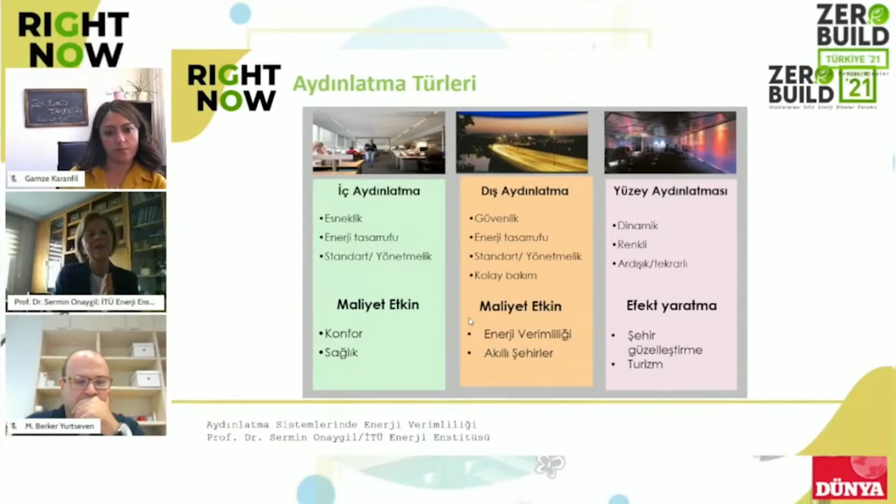I work on roads and tunnels, and I continue to work there and like it very well. They are more challenging lighting forms, as you need to calculate much detail. However, here we see internal lighting, external lighting, and surface or superficial lighting. If you categorize them, we can better understand each other and appreciate the differences.

Let's look at internal lighting. Here we should have flexibility, because I make use of this room one way today - I might change it tomorrow. I'm using this place as an office; I might use it like a bank tomorrow. So you might need flexible solutions, and energy savings matter - we discuss it a lot.

Here we need to look at the standards and regulations and deliver what is required. Everyone is talking about lighting, but the number of people assessing whether the requirements are met is really low. First, we should meet the requirements and then try to save on top of that. They say you should compare apples with apples, not pears. Also, they should be cost efficient with comfort and health aspects.

Now I move on to external lighting - security and criminal crimes are part of it. Energy saving is the second item. Standards and regulations also apply there. So, because we're talking about external solutions, easy maintenance is the fourth item.

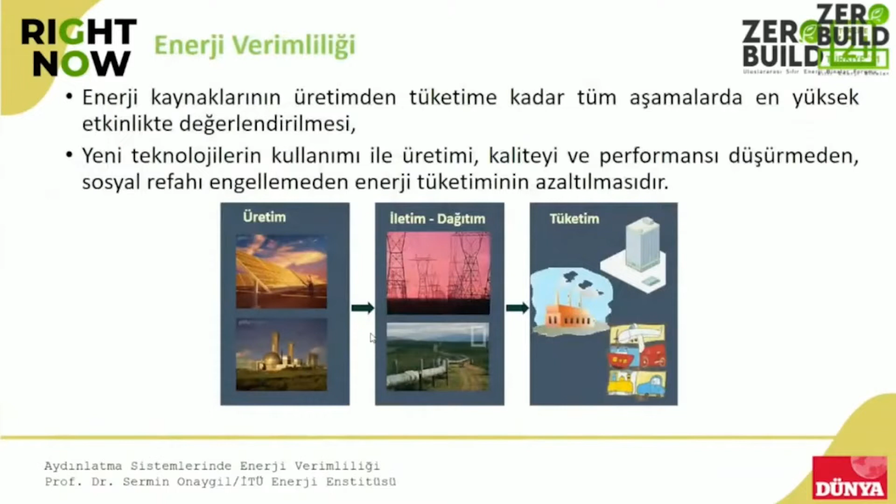Now we're talking about energy efficiency. Generally, that's where we focus. You take one source of energy and make it go through different stages. In these stages, you need to think about an illumination-based approach. You may turn off the light and have savings, but that's not what we mean. We mean we will use new technologies and ensure that we actually focus on social welfare. If tourism is important, then you need to illuminate. If security is important, you have to do it. So ensuring energy savings without minimizing those costs is important.

Energy savings should be separate from energy efficiency. Energy savings can be deliberate or indeliberate. Here, users decrease the amount of energy they use or minimize it by themselves. But in energy efficiency, you need new technological means. You should have an awareness, and you should also serve a certain goal. There are multiple parameters here. Everyone is talking about energy efficiency as a buzzword, but how is the main question. Different experts should work together as capable individuals about technology, but also multiple parameters like the economic and social dimensions should be considered.

If you have two lights, two bulbs, you can turn off one of them and have savings. But as you see, the bulbs will be switched to LED bulbs. When you use this unit with less consumption, technologically speaking, you ensure energy efficiency.

Lighting consumes electricity energy, and here we can say that it is an important parameter in terms of energy efficiency. Generally speaking, in industrial facilities, in commercial buildings like shopping centers, hospitals, offices, and even residential buildings, when you make an overall evaluation, you can say that 19 to 20% of the electricity energy is used for lighting purposes. But these ratios change depending on the usage area. That's 30% for a shopping center, but it can go up to 60% in hotels or 40% in offices. In homes, it's 10 to 20%, as refrigerators are an important factor since they continuously work. In the textile industry, this number goes up to 30%, but in iron and steel industry, it's just 2-3%.

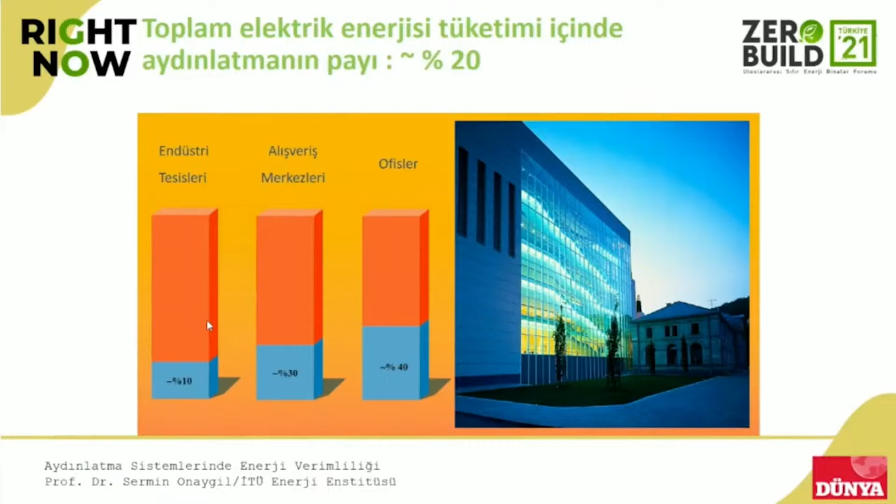And here we know that we have to continue our path by decreasing energy costs here in all the current buildings.

So we differentiate efficiency from savings. Efficiency isn't about turning off the lights. You're not actually compromising on your comfort. When you do these lights more than necessary, this may look great, very glaring, but that creates an adaptation problem for people, as other spaces without this many road lighting elements will seem dimly lit by comparison. That's why we should have a holistic approach.

And we have our national energy action plan. We have certain targets; we say we will have savings of 20% until 2023. We have strategies, etc. That's all great, but we should meet the necessary lighting criteria, and we should examine well so that we do not move to a dangerous area.

What should we do? First, we will use appropriate light sources. Everyone is on this line, they say we must deal with it. Let's say we change the chargeable lamp unit. You remove that, you replace that, but you need to conduct calculations before doing that. You will not send light up in the air; you need to emit the light to the road surface if you do that. So actually, you need to work with armatures whose values are known.

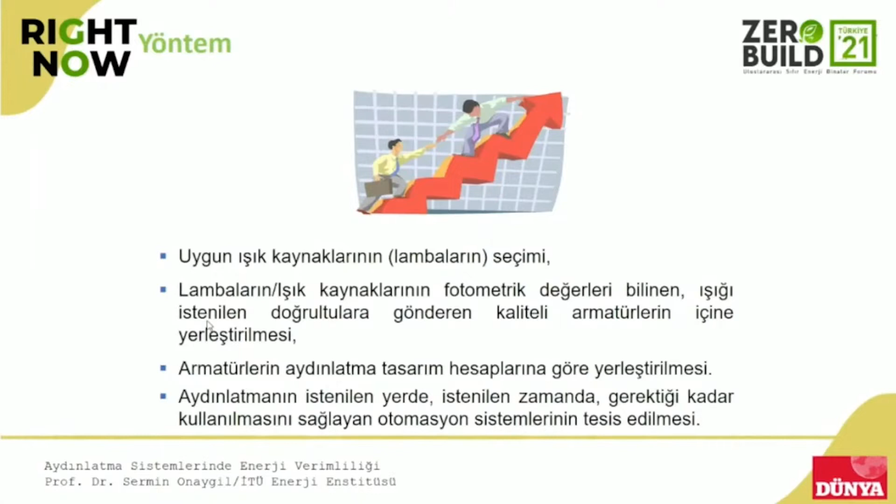These devices and armatures need to be calculated in terms of savings. We must know the types and varieties. Now we move to savings calculations for armatures and fixtures, and limiting their use to the necessary requirements. In offices, we can do certain activities within certain hours, so we need to test the automation systems as we calculate that.

If you want to decrease your energy consumption, I didn't want to elaborate on formulas much, but let's elaborate. This is the watt-hour energy, electricity energy consumption - it's joule divided by second, or watt. And here, when you enter a building, you can also check your home or school.

You see different armatures in classrooms, different armatures in corridors, teachers in the teachers' room, in canteens. So every installation needs to be assessed separately, and that's how we make this calculation.

We need to look at the number of armatures in every installation, the amount of power drawn, and the duration of usage and dimming for these armatures. If you pay attention to all of this, then you're going to reach the overall amount.

Here I would like to point to this area, which is about power. Actually, our light sources do not work by themselves. They have transformers, drivers, ballasts, and other elements that work with them. So power should be considered as the total energy taken from the grid.

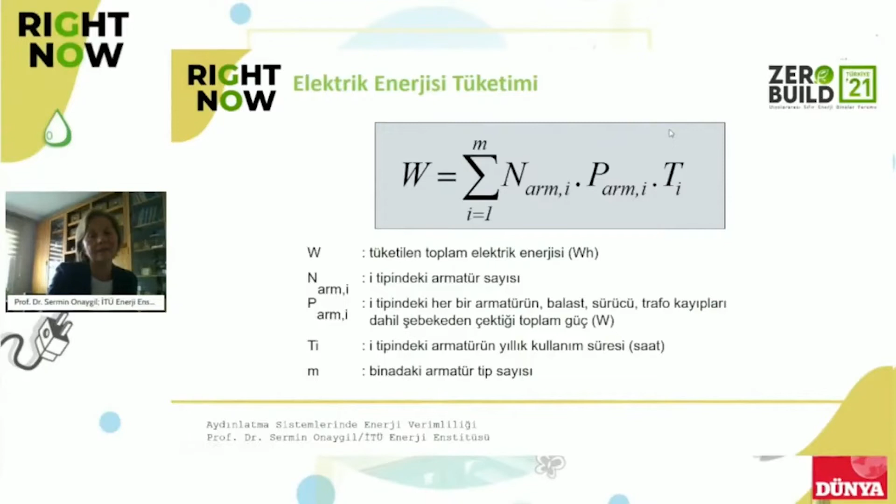You need to look at where you need the lighting - on top of the table, in the house, on the road - and here you arrange the timing with automation systems, and you need the appropriate strategy and systems.

And here you can see a summary of it. You should follow up on the newest technologies and choose the most efficient light sources and other elements - ballasts, transformers - and here LED is included. Also, we should ensure that we place the light in high efficiency armatures, and control systems and lighting systems should be working wherever necessary.

By the way, Professor Gamze, if you have any questions, please do interrupt me. Sure, Professor, I'm following. I am going at full speed, so please - no, it's going very well.

Well, we have to make efficient use of all these sources. Everyone is talking on this layer. Unfortunately, we have to go deeper together with the architecture discipline.

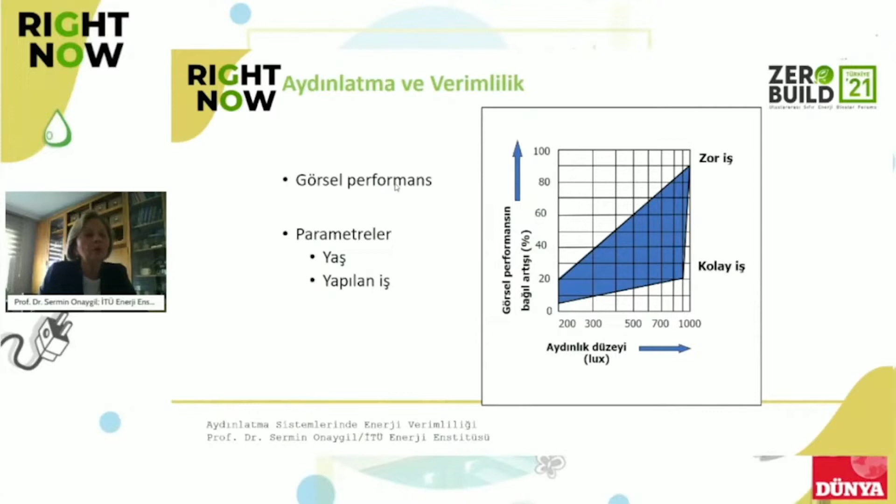Also, I have to refer to efficiency not just in terms of the decreases in energy bills. You are having a conference with many agenda items, and here they're talking about zero buildings, net zero energy.

Here, actually, the user is the most important element. When you ensure comfort, actually you see an increase in efficiency. And that's a huge argument for us in lighting, for inside and outside the buildings.

By improving lighting, we see many activities inside the buildings - qualified staff works there with well-paid jobs, but the number of sick days or performance evaluation days, and safety issues, if you consider all of them - for example, in night shifts, a person might get their hands squeezed in a machine.

So all these security issues are strong arguments. You need to look at the parameters also outside the invoice. It is something very difficult, but we need to have such research activities. We can do this by checking something before and after, and also you need to have observations and check the performance of a person.

So here we use lux as a lighting level. When you increase this, actually the visual performance is enhanced accordingly.

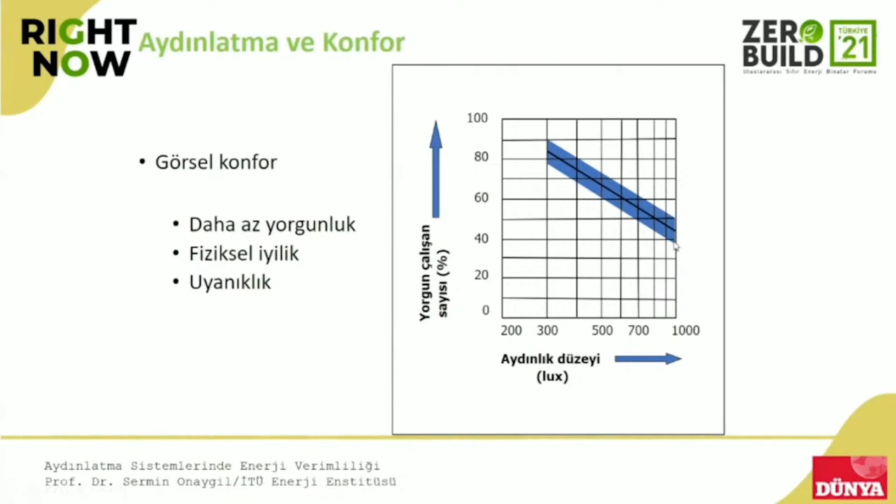Exhaustion - for example, night shifts. They conduct tests to understand exam performance under a particular type of lighting versus another. So visual performance is related to lighting level. If it increases, the number of employees with fatigue actually decreases. That's why lighting is an important parameter.

Also errors - in the automotive industry, where you have manufacturing of quality products, mistakes matter crucially. Customer satisfaction, quality product, the number of products with a defect - all are actually taken into consideration as lighting parameters.

Accidents - you can talk about traffic accidents or occupational accidents. For example, someone due to stroboscopic impact may see something turning as static due to lighting issues, or a pedestrian might actually appear suddenly before a vehicle. If you do not have good illumination there, you may cause accidents.

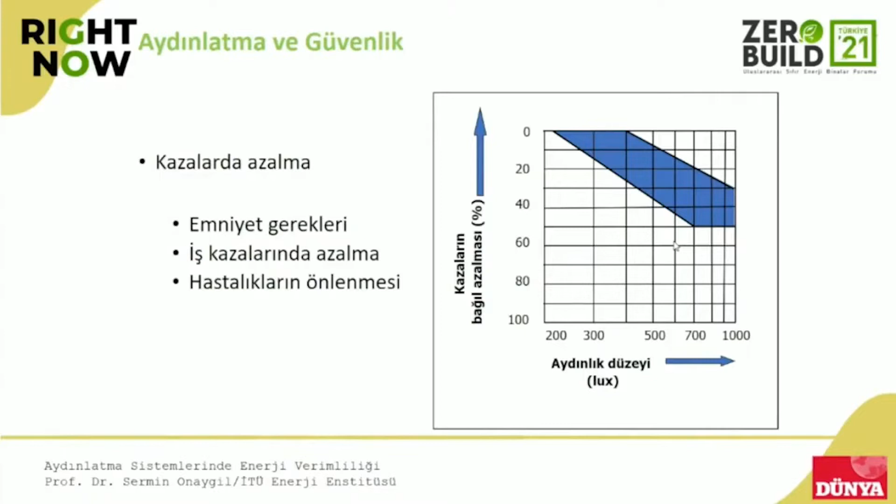Also diseases are addressed, and COVID-19 is a daily topic. When we looked at lighting, we used to think of visual impairments in the past. However, with UVC bulbs, we know that microbes or other germs can be killed. So there are different sets of research concerning that, and it's difficult to sum up everything in a short period of time.

Electric vehicles, stairs, elevators are all part of it. But illumination or lighting systems are included in our system together with architectural project design, building and facility installation, heating, cooling, lighting, and renewable energy cogeneration, creating a cycle.

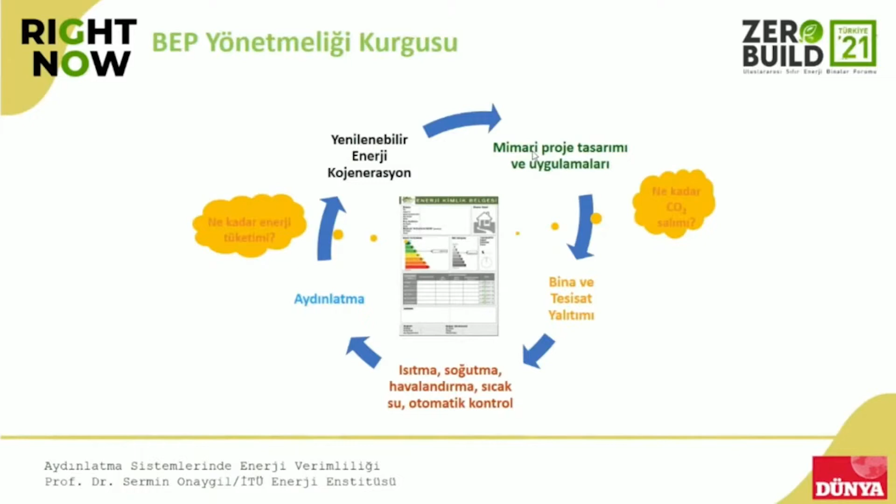And here we have a certificate which provides this information: the amount of energy consumed and its equivalent as CO2 emission. They say you can turn off the light and save energy, but should that be the real mindset? It shouldn't, because in illumination and other areas there are standards and regulations. The values should be the main priority - ensuring that we meet these regulations.

We can look at new buildings and current buildings. In new buildings, we have those at the project stage, and here we have computer support. Since 2011 they are evaluated as part of the lighting systems with certain okay and missing points. But in current buildings, we need to look at certain aspects, including projects, and sometimes they are missing.

An office building might be utilized differently - on one floor there might be an insurance company, on another floor there might be a bank. So it's difficult to just look at the projects; we need to have on-site technical evaluations.

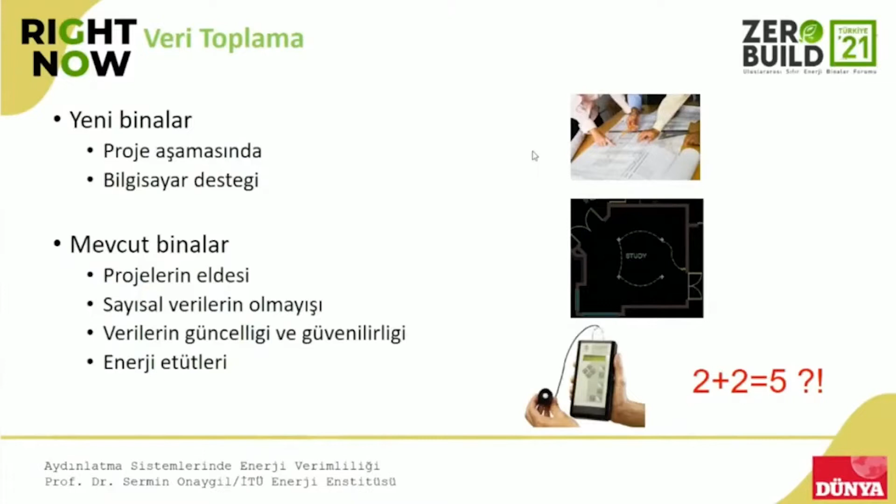You see the lack of figures, and you have issues regarding the updates, so we have to look at data. This is all related to the current system which is present, and then of course based on the climate and other things that should be taken into account. So when we say installed power, we have to look at the luminaire numbers, also the number of light bulbs, etc. The photographing and other things have to be done in this regard.

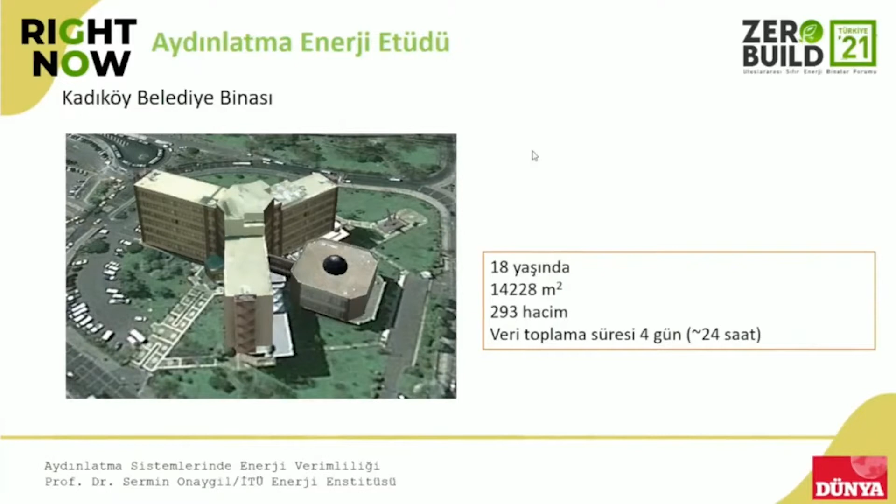For example, in the Kadıköy municipality building, it was done in 4 days and 24 hours of work. It is an 18 year old building, 14,228 square meters, with 293 volumes. They were put into Excel files, and it looked at what the current situation is and what suggestions are recommended, trying to have it within proper system harmony.

Of course there is the lighting energy numeric indicator, which is called LENI in English. So we can say that AESG in Turkey is about the installed power, the energy amount in kilowatt hours, divided by square meter and year.

Let's say you have 1,000 square meters, how many kilowatt hours of energy you use, and somebody else did the same with a similar square meter, but the conditions of use can be different. Or there could be two classrooms, for example, one has 500 lux and the other has 300 lux. So the 300 lux one is spending less energy. Can we say that this is better performance?

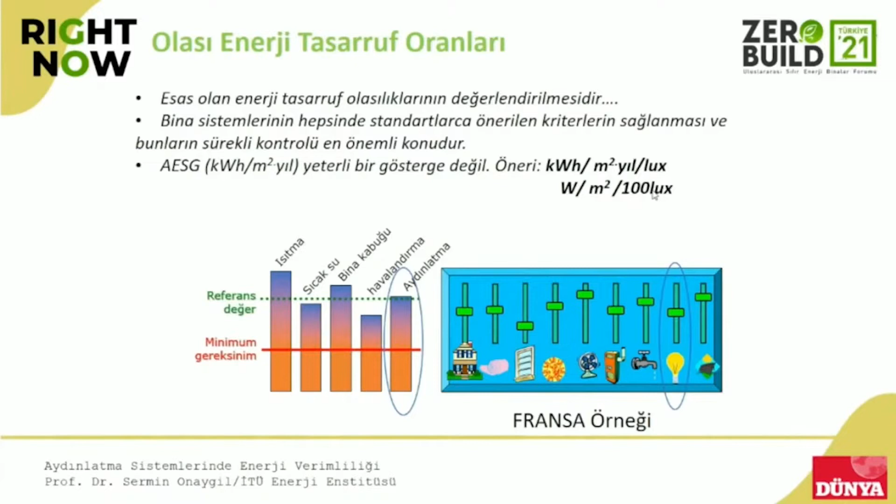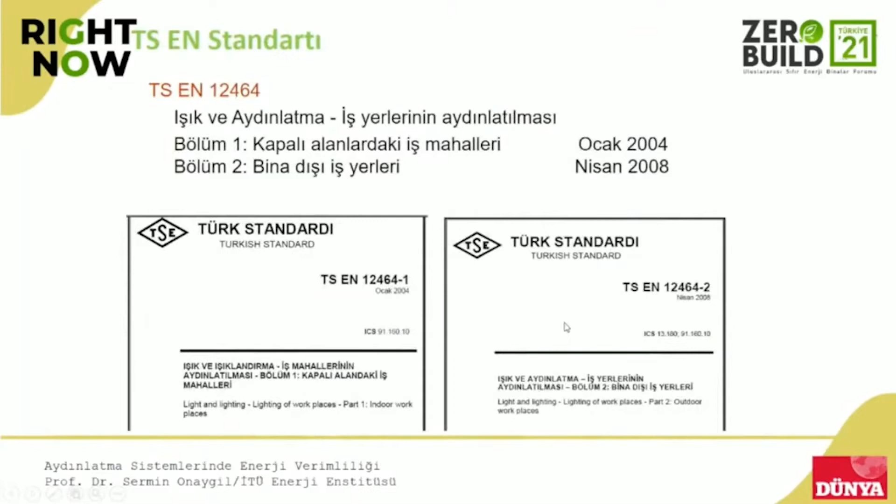We're trying to evaluate this, and of course we look at whether these conditions are there. There are many things like occupational safety, etc. There is a general 15193 energy directive as a reference, and there is a lighting systems standard, 12464, which is a Turkish standard. The first one was for internal, and the second one is for external lighting.

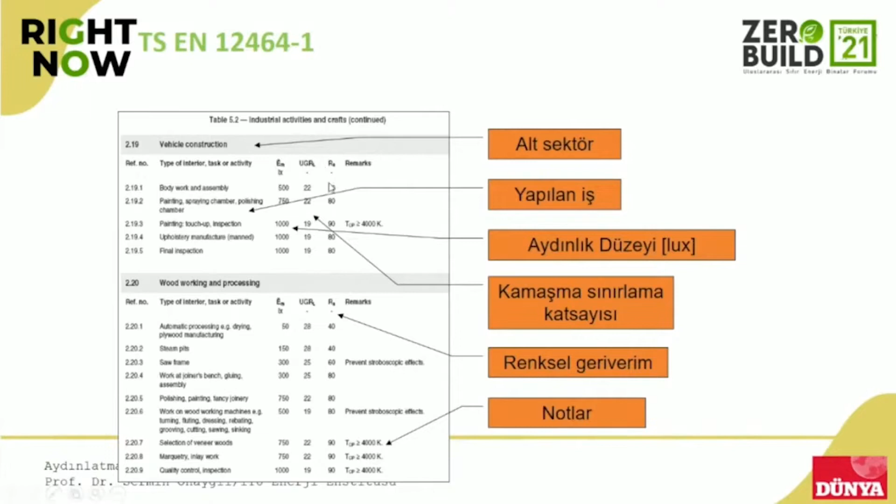When you look at this, for example, there is the automotive sector. It shows whether there's assembly or painting, what is the absolute manufacturing, and it's based on this, and also the color for this, and there are certain remarks.

So when we look at this, when you put a large light source there, there is the lighting power magnitude, and this is the level of lighting. It is measured with lux, and you can get a photo cell and measure this. But if you look at it from one angle or another, it is different. If it's frictional or a flat surface, that is different. So when you ask what you see and look at this, there is also the brightness.

For example, the critical lightings. Of course, we look at this and we make a calculation about what we see. But in the building, flux is generally enough. We can say that the lighting divided by lumen can be found.

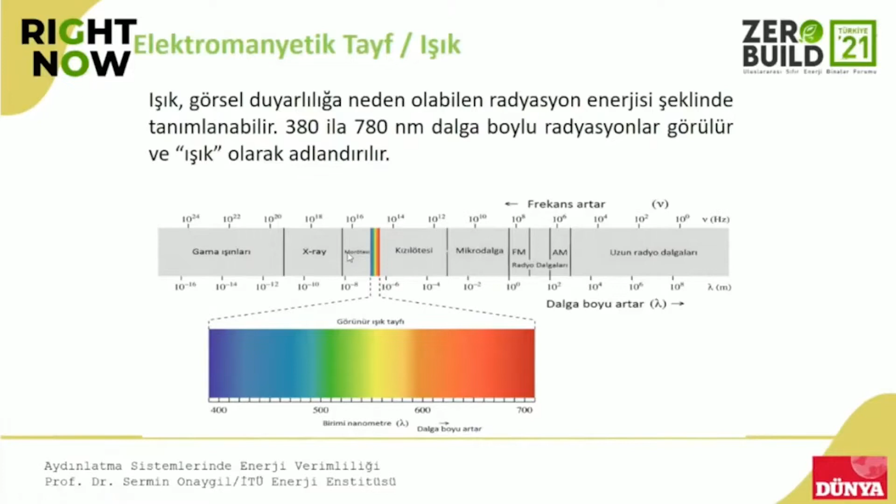And also, when we look at this, we can say 360 nanometers and more. We can see the right hand side is infrared, and the other one is X-ray. As you see, when we say lighting, it's between 380 nanometers and 780 nanometers, but there are different wavelengths. For example, there is 555, that is the highest one. This is for daylight, and also there is for buildings. This is only available, of course, like a curve there.

You see the blue ones and the red ones, and if I am the producer of an energy efficient light bulb, if this is so, we can say I need to give a light resource with yellow and green. This would be an efficient resource, but for other countries, it's a different part of this spectrum.

So when you say blue and red, you see it under sunlight, daylight. So there are different types, and if they are lacking, you don't see it as red, you will see it as brown actually. So the efficiency and also the perception of color is different.

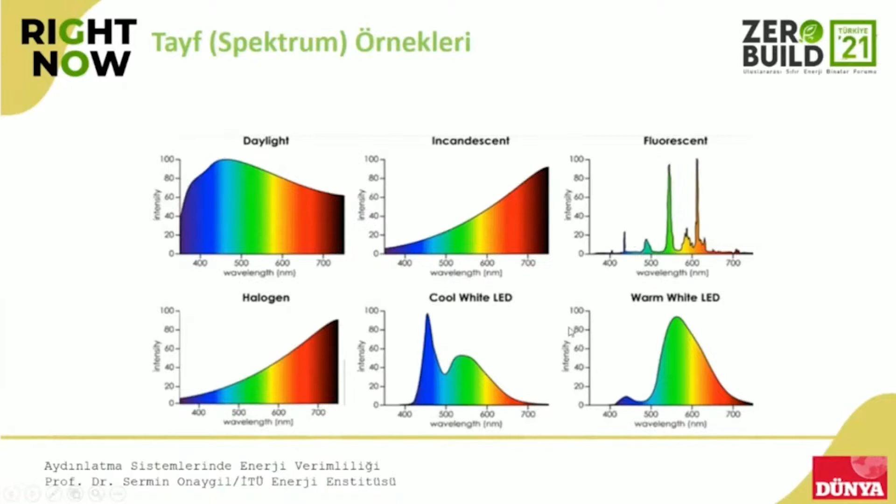For example, in daylight all of them are there, and in an incandescent light bulb, everything is there too, good but not efficient, or fluorescent. And when we look at LEDs, for example, it's a blue one. These are the polar colors, cold colors. When you go to red and yellow, those are the hot colors. So it's about having this - it affects the color, whether it is red or yellow, hot or cold. So when you go away from Edison's light bulb, you have to look at this very carefully.

When we say lighting production, there are two systems. For example, in a fireplace, timber or wood is burned, and here with different sectors, for example discharge lamps. From one to the other, there are new technologies, the LED blue ones, and now we have LED power and LED resources. We do not use this in incandescent, and so there are sodium lamps as we can use.

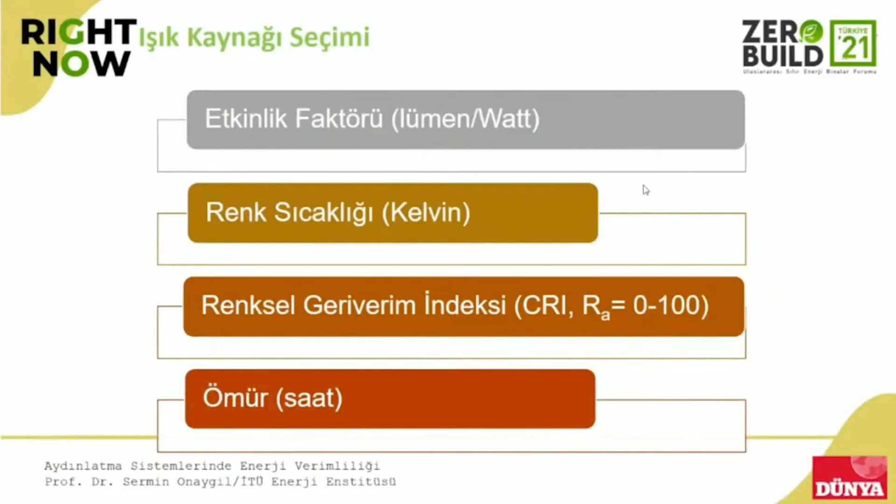You pull some power from the network, but there is the light. You can see it as a watt, and there's an efficacy factor with lumen. You should notice when we say lumen, this is about the radiation, the value of radiation that you can see. So we can say beneficial radiation for beneficial lighting. When lumen divided by watt, it gives you the light.

For example, Edison's number is 12 lumen per watt. For example, for LED, it is 150 lumen per watt.

So there are many different light bulbs, and in 2019 and 2020, there are eco design requirements for the classification of the lighting resources, classification of the users, and there are self-limiting studies like refrigerators, like the buildings. The lighting goes from A to G, but for A, it has to be more than 210 lumens per watt. So there are other things. This is very difficult to achieve.

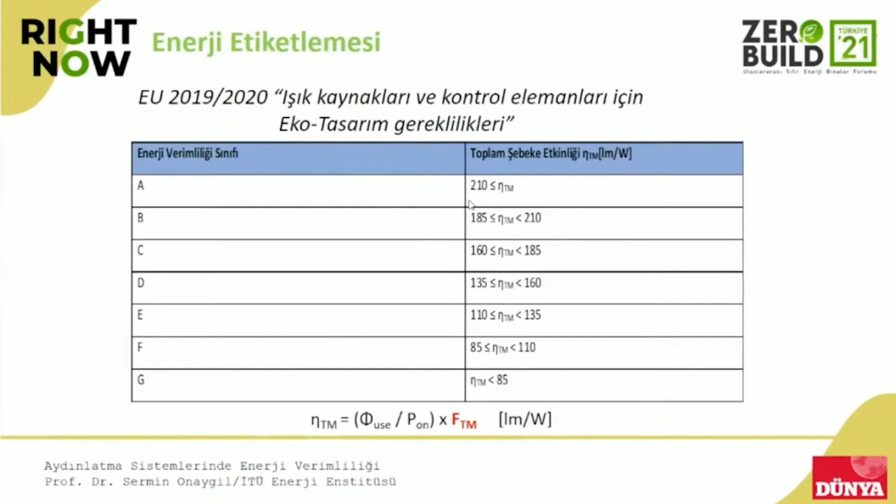So in energy efficiency, new technologies are challenged. When new technologies are used and when the project is done, it's not saying that I will use a fluorescent only. You have to look at the lumen per watt, and this is how the energy classification should be there. So we look at the lumen per watt.

There is a reverse correlation. I select the highest efficiency one. For example, I'm doing something with a textile industrial shopping mall. For example, a person takes a coat as green, but it is actually confused as brown.

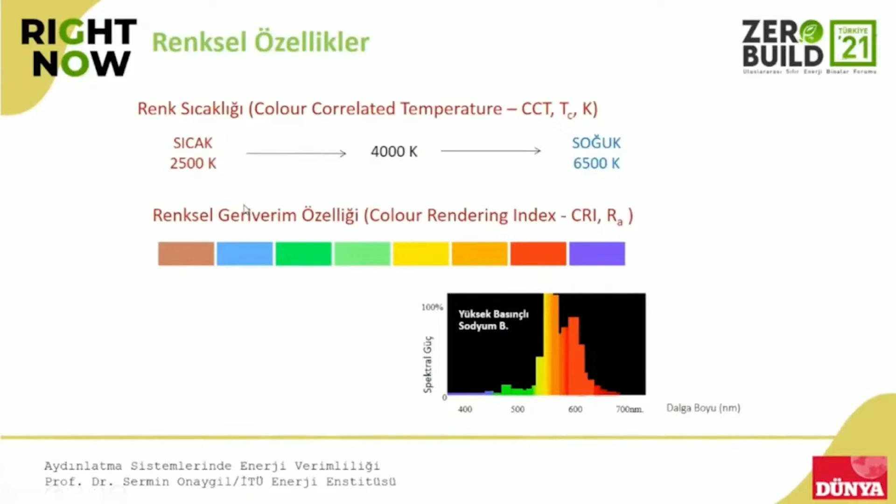So when there is the color, of course, Kelvin - the correlated color temperature system. So if there is the color rendering index for optimum, you have to compensate or compromise the watt, and we have to look at the correlation.

The color resources should be there. When you say I'm putting this for that, you have to look at all the things, and some people like the ones called, for example, the LEDs, no matter what, they are cold colors. So this is about the structure, and when you look at the LED, there is the hot and cold. As with Edison's light bulb, we see that there is much good progress in this regard.

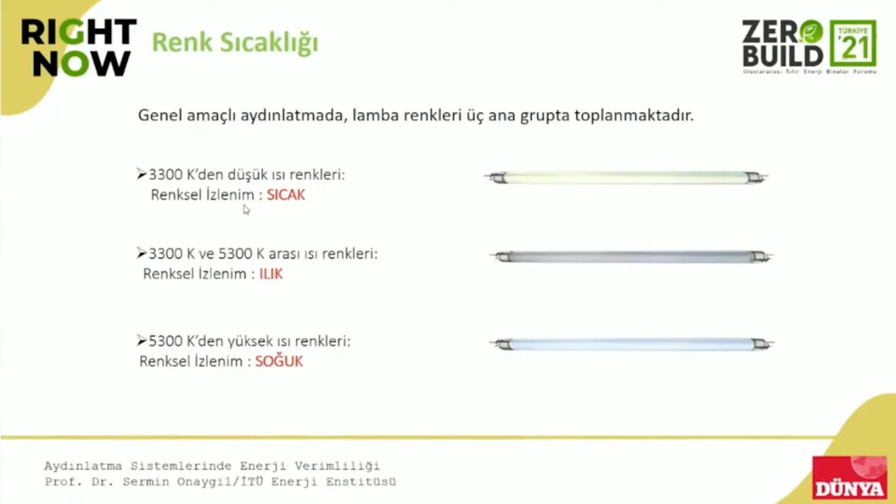The Kelvin, there is this like a reverse correlation. It means that the hotter it is, the bluer it is actually. But it's about the value you use.

So you can use hot colors for low ones, and if there's timber and wooden materials, hot colors are taken, and for teachers, if they are making some activities, we can say that it's more than 4,000 Kelvin, and also there is human centric lighting.

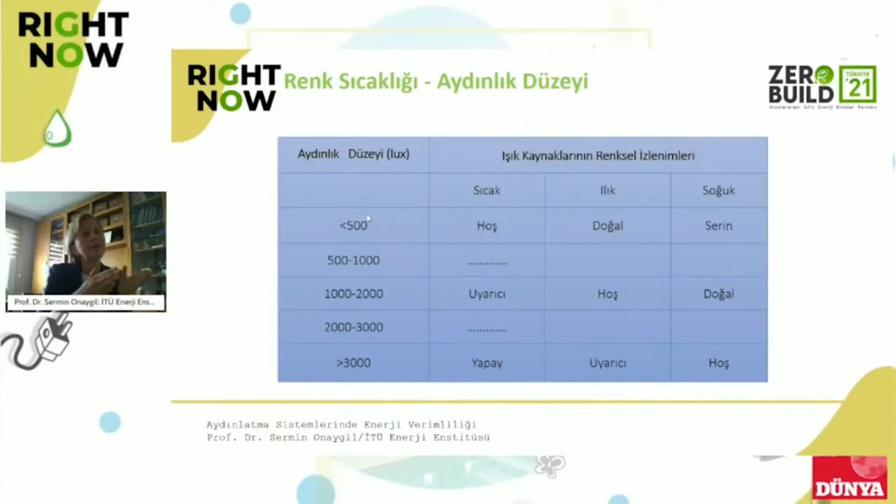There are automation systems which regulate the color. The child wakes up and comes, and this is hot colors. And when they go back, there are hotter colors. So we can say that the colors in terms of productivity increase, and in terms of the acceptance of what you do, are very important. These are all important arguments.

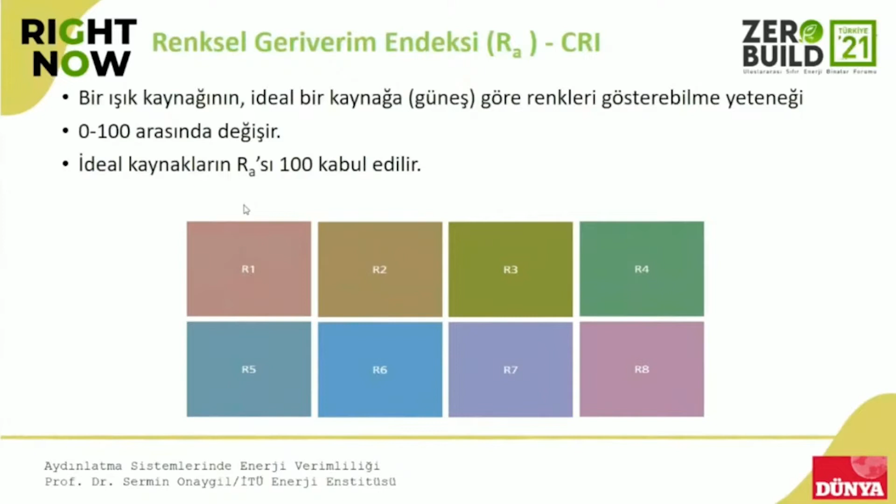And of course, there is hot and cold colors, and also it's about making the perception of the red, green, and blue colors. So indoor lighting, this value changes from 0 to 100, and it is not possible to use below 80 - it is forbidden. However, in an art workshop, even where sketches are made, you have to put it at like 95.

So the life cycle is important, and of course, as I pointed out, Berker gave me a bit of time, like 10, 15 minutes, for the systems. Should I continue, right?

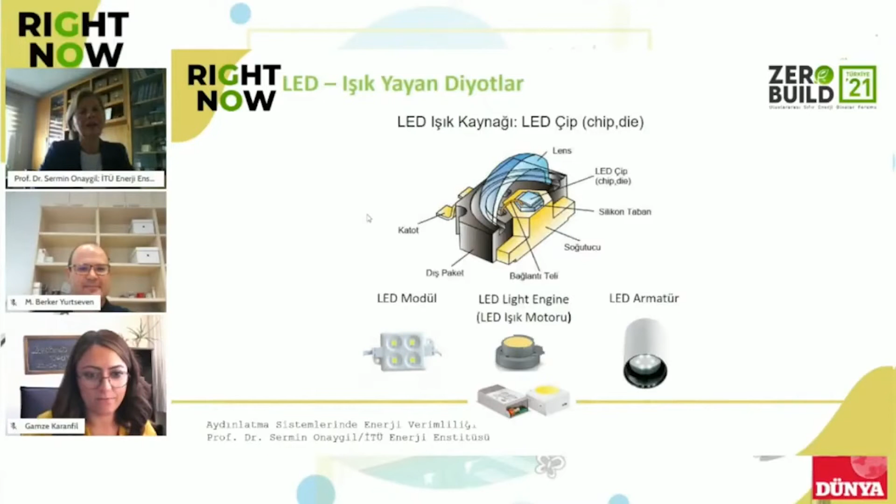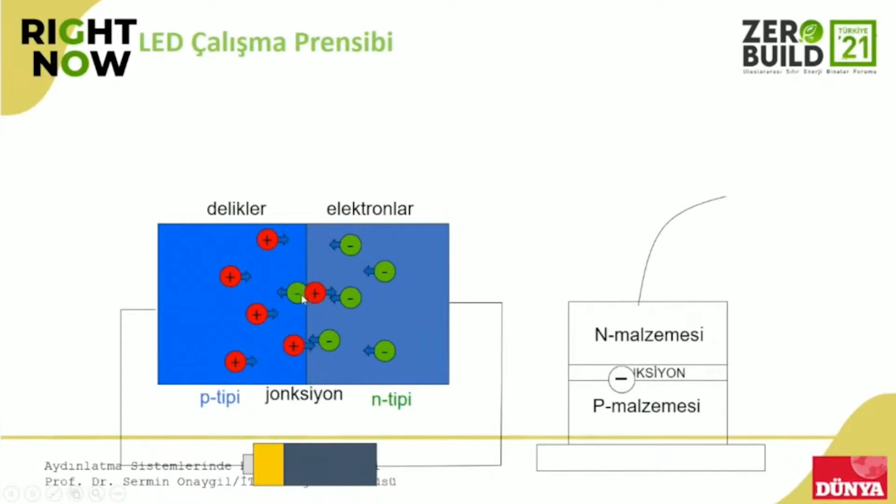It says conductive there, and there are two systems, in positive and negative, we see two powers, and also there's electrical current that is given there, and also we see at the junction there are some holes here, and when you have this, you see that it produces a light. It's actually creating radiation, and it could be photons, and we could see that effect.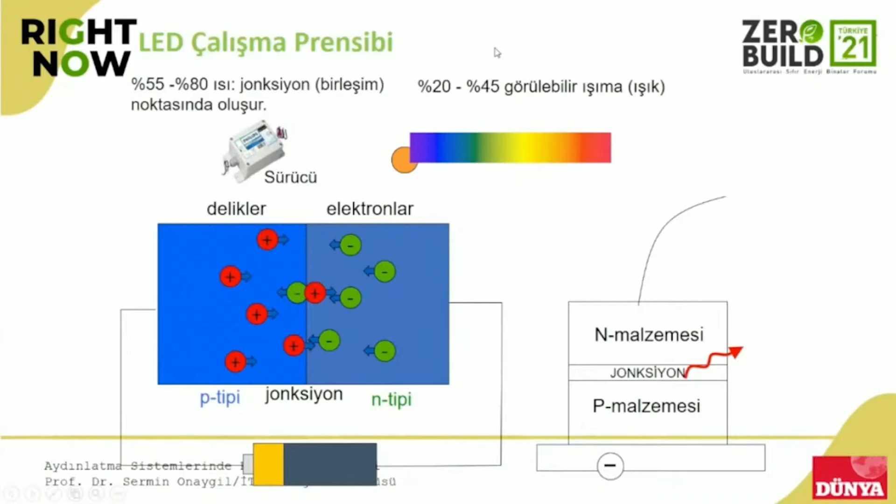So it should be looked at, and also we see the heat, and it is a loss, decreasing that increases efficiency. It is used with the driver as there is a right current, there is electrical efficiency, and there is thermal efficiency, and as far as we can see, it has to come up with the power.

When you see that there's a phosphoric layer, it shows the seeable area. In order to give you seeable light, there could be a short wave. There is phosphorus there, and the phosphorus is put in the ultraviolet area. So we see the white color lighting with this, where the red, blue and green are mixed, and you have the power, but you have to have lighting. Generally it is used in the short wavelength.

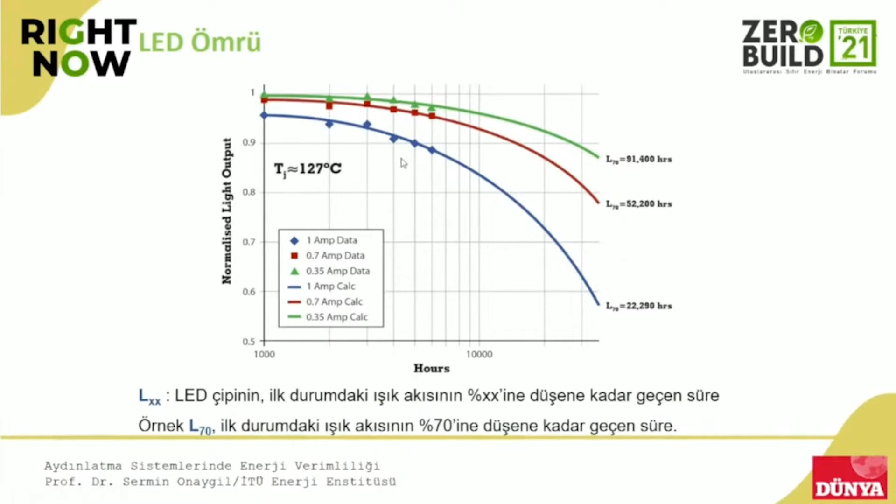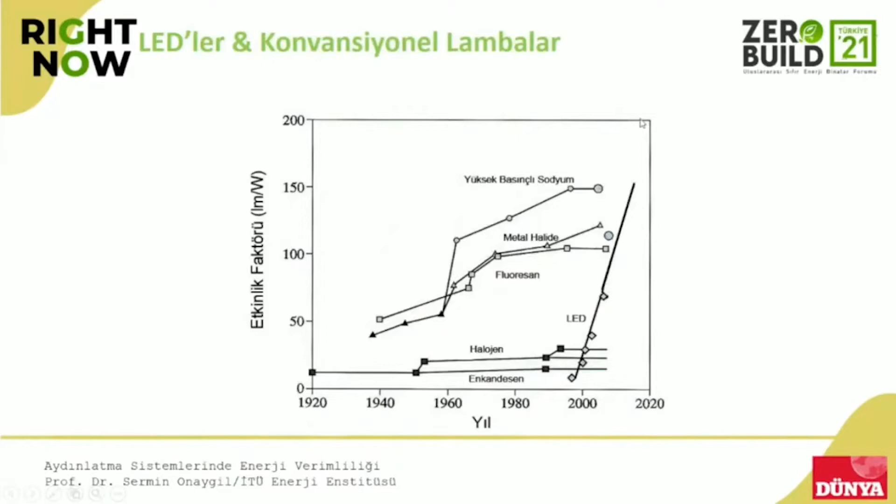There is a phosphor, the yellow phosphorus is coated, and when you look at LED, you see that actually in all of these, the use temperature is very important. Efficiency is very important. So when you say you switch to LED, you have to look at studies to evaluate all the factors. But since 2000, the others are there, but the LEDs are replacing the conventional light sources.

I have two slides here, about the lumen per watt. When you compare all of these, for example, in incandescent we see 8 to 22, and in LED 80 to 180.

But at the same time, under normal conditions, for example here, a fluorescent lamp has 110 lumen per watt. You have to be more careful while putting LED here. For example, the sodium, high pressure sodium, is 70 to 150.

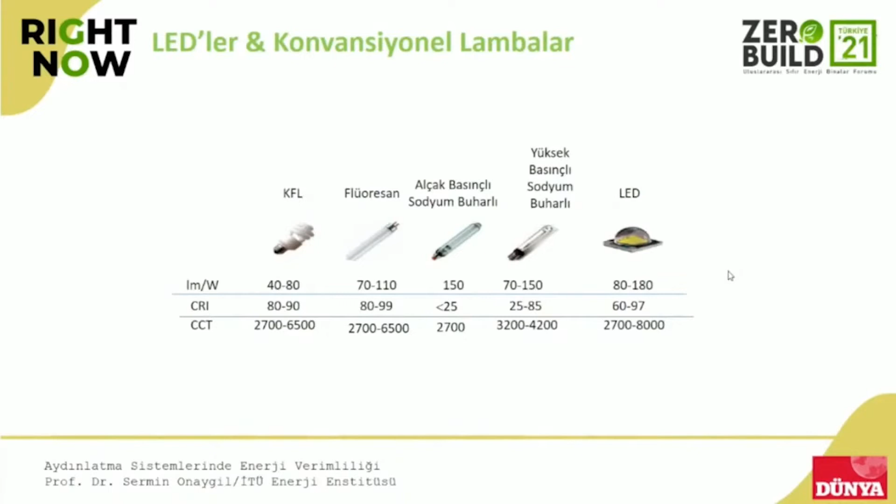So since 2000, the companies are working in this regard. There are the right specifications with the right implementations, practices and applications. We're trying to continue. There is the LED, the lens, the printed one, the cooler, the driver, the armature.

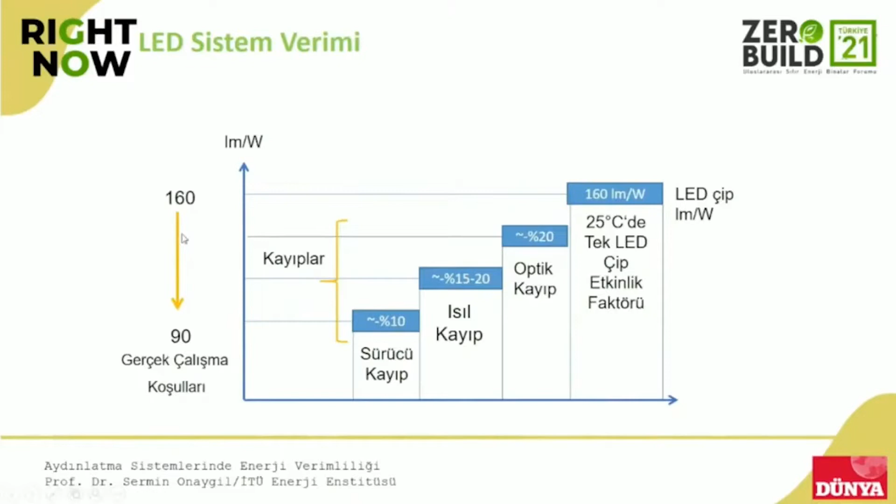So we can say that this is the armature, and we cannot now make a separation. It has to be evaluated together, as we cannot make a separation. A chip can have a part of 160 lumen per watt, but it can go down to 90 lumen per watt, and it should be 130. So you have to come up with the armature, and you have to use the design of 130. So the distribution is very important.

The photometry, it is called, and for example there is direct lighting, but in terms of comfort conditions, the indirect ones could be used, but the direct ones should be used.

Of course, control - opening, turning it on and turning it off - there are motion sensors and controls, and integrated systems are there, integrated with heating and cooling systems. So for example, the radiation actually increases or decreases your heating or cooling gains. And of course, within the building management systems, that has to be taken into account, and the lighting becomes a very important element.

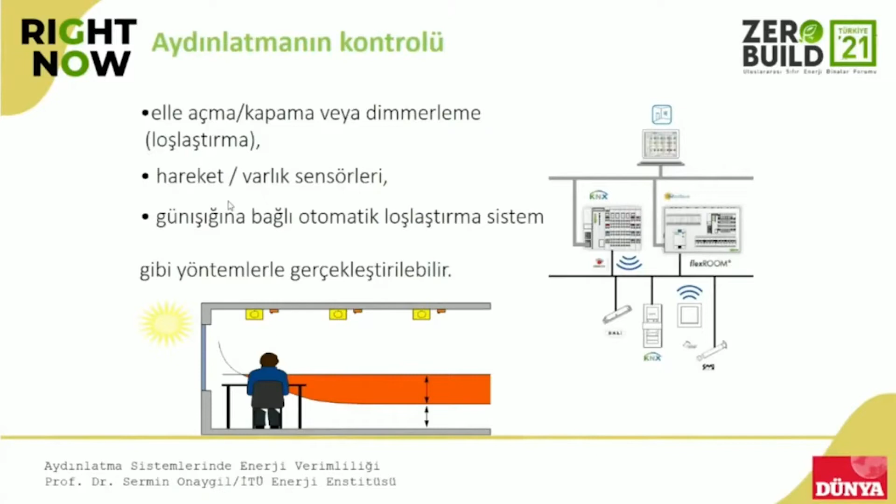So it is not easy to do that. That is what I'm trying to say. Sometimes the clear-cut approaches may not be the right approaches. You cannot say that I put the light bulb, and the ROI is 6 months. So when you have integrated activities, we are talking about the return of investment being like 3 or 4 years, and when you consider it from the performance, you have to have implementable projects.

I'm saying this because, for example, in zero build activities, we are using a technology, and when this technology is selected right in the beginning, of course there will be a cost. And of course, the return of investment should be taken into account with these parameters.

For example, this is an office building that you know very well in Istanbul. It's 18 stories, started with offices, then it turned into banks and insurance offices. So, for example, the armatures changed, so then there needs to be 500 lux, but when you just measure it, it is 200 lux. It is an 18-story building, with 12,000 square meters of land.

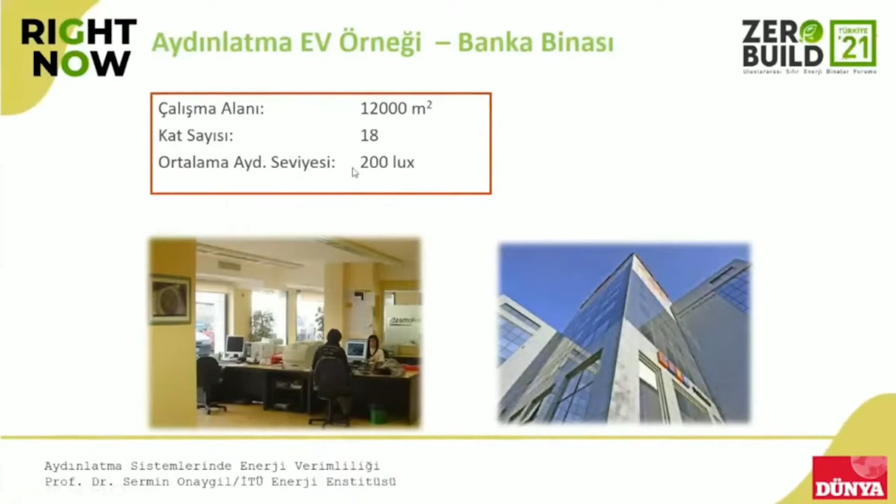For example, when you look at the system, there are fluorescent light bulbs, and you can go for LED or better lights. And after doing this, actually 200 lux is not enough. It has to be 500 to 550 lux.

This is what is offered by the standard. So we will increase it from 200 to 500, 550. This is how we make the savings. Of course, the armature number decreases when selecting the good armature. So when we look at electric energy, the saving is like 50%. And when you have the daylight control system, the saving is more than 60%. However, the return of investment is in 4 years.

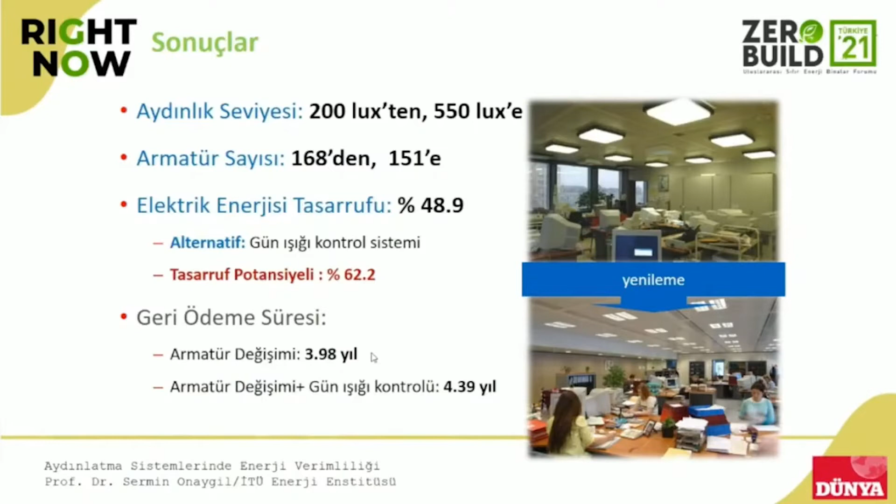However, I can tell you that with the lighting systems, you can install systems which have a return of investment of 3 years. So if it is 6 months, it means that it is not conducted very well. But so 1 to 3 years, there could be good solutions.

I'm going through the end of my presentation. Actually, we have some tolerance for questions and answers. The calculations are very important, the designs are very important. But at the same time, there should be data of the armatures that you're using. For example, there are sheets and calculation methods. It's like making a project. So it is not that I put it and take it out - it means that I calculate and then I put it there.

For example, when you look at this, there are four fluorescent lamps, tubular T6, used everywhere. There are 4 armatures also at 18 watts. However, here it's 33 lumen per watt. I make the calculation - although my objective is to achieve 500 lux actually.

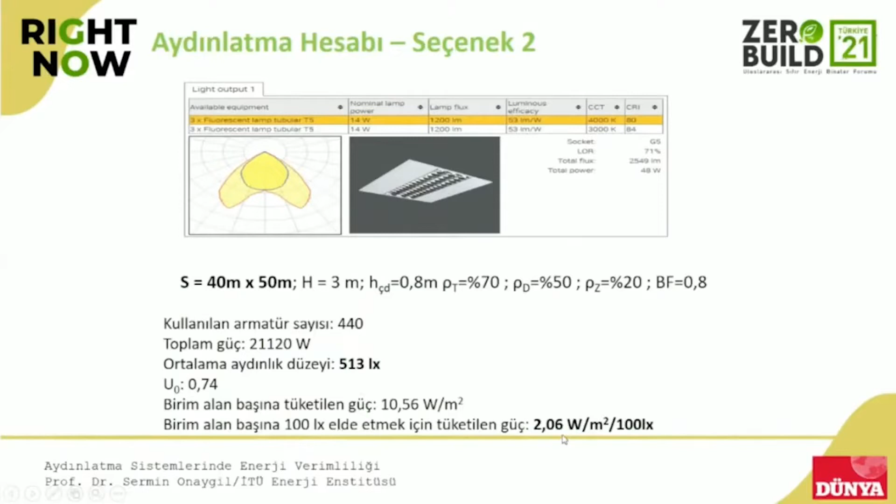As I told you, in order to have 500 lux, we need to look per square meter how many watts that I should spend. It is 2.2. We will look at this as a whole in a minute. And I bought a different armature, and there is a different structure there - this one is 53 lumen per watt. And the lux is 513, and now the indicator is 2.06.

We bought a different armature. We use this, and there are 2 lamps, but it is 120 centimeters. So now it is 73 lumen per watt. However, there is 516 lux, and when we look at the indicator, we decrease to 1.5.

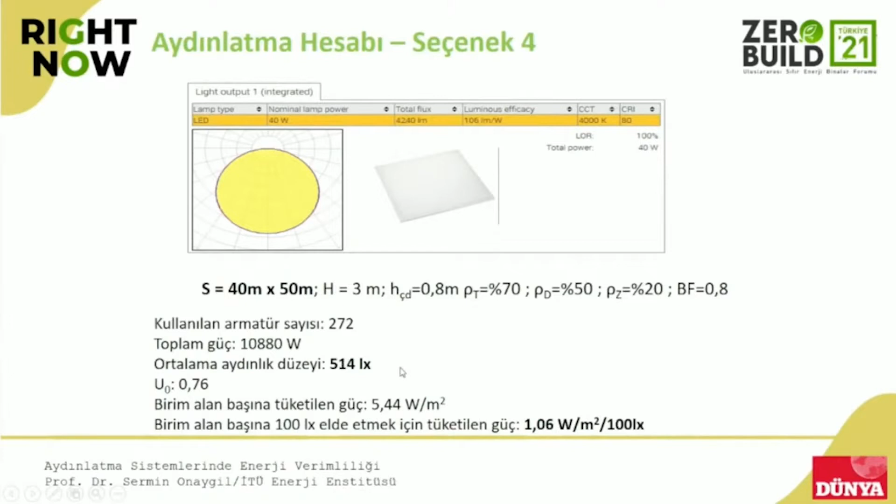I buy the new one, there's a panel armature, a good one. There is 106 lumen per watt, and the lux is 514. And now the indicator decreases to 1. And when you look at this as a whole, we can go from 2 to 1.

Of course, I'm always within the concept of 500, but the number of armatures decreased and the operational cost decreased. And also when you look at the unit cost within this system, the armature cost will decrease as well - of course it's an important parameter. So the data looked at here uses the objective of ensuring 500 lux, and if it is 500 or 600, there will not be any comparison or benchmarking criteria. So this is my last two slides.

As of 2015, there is a new era, which started 2 years earlier, and in 2010 that entered into our lives. I didn't look at LED, but after 2010, we've been working on this LED issue technology-wise. And there is a LEDification process after 2015. However, there are intelligent lighting systems that you have to have control over - the new systems should be there, but there should be control.

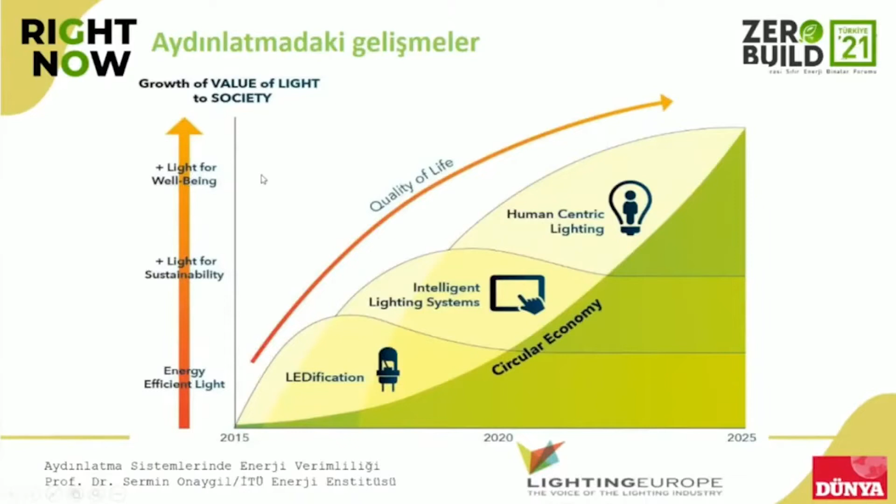So when you look at this, energy efficiency is important. When there's control, there should be lighting for sustainability, and above that, until 2025, there is human-centric lighting. It's about feeling better, increasing comfort, increasing performance - the quality of lighting is changing in such a way. Human-centric lighting is about the color and the level of the lighting.

So you start with low lighting, and then we are following the daylight, and then we go to cold powers, cold colors. And we can say that these activities are conducted at schools, and we had to do them in the projects that we have. So it's about the biological rhythm of this.

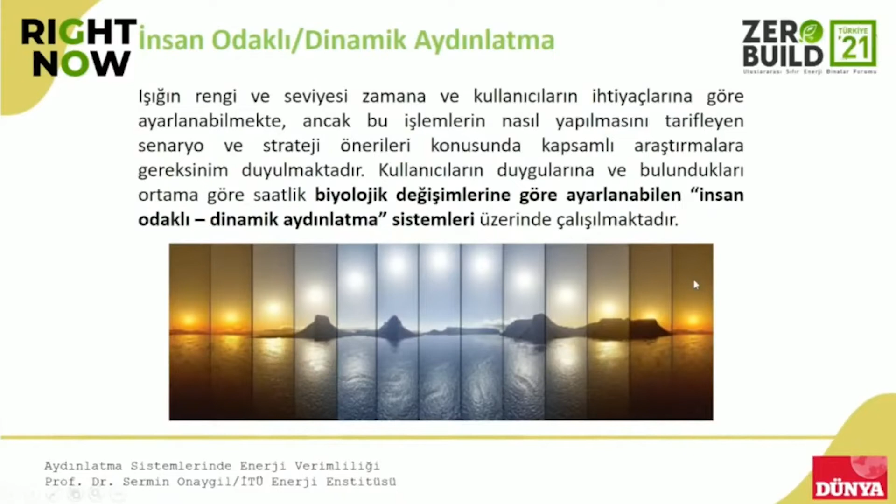COVID is very important - we are working at home, and of course the lighting should be in line with the biological rhythm. So there needs to be a motivating factor. So there needs to be dynamic lighting, human-centric dynamic lighting should be there.

It's the lighting out there, and of course there are smart cities. The lighting is integrated in the parks and gardens, and in the synchronization of the traffic. These systems are continuing - automation and LED systems. Maybe 10 years later I will say a different light technology. Now I say LED. So as we survive, we have to study all of these.

Therefore, I'd like to thank you for your attention. I've taken like 7 or 8 more minutes. Thank you.

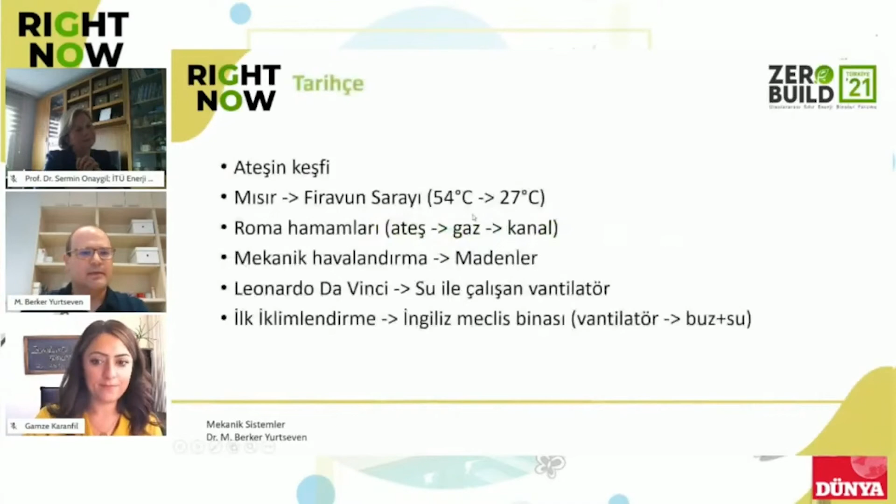The history - no need to go back to the beginning of the world or the universe, but everything is based on our needs. So heating, cooling, or ventilation systems are also related to our needs, and it is about our need for heating. The discovery of fire is the key issue, about 1 million years ago. At that time, people were living in caves, but still there was the need for heating, and that was the first version of heating.

When we look at the cooling history, the first practice, the first application, was with the pharaohs in Egypt. As you know, Egypt is a country with high temperature - a desert climate, hot during the daytime and cold during the nighttime. So they put stones in some areas to cool them down during the daytime and nighttime, then used them during the daytime within the palaces, houses and buildings. That was the solution at that time, and we still use the same mentality - it's the same for the baths, the Roman baths.

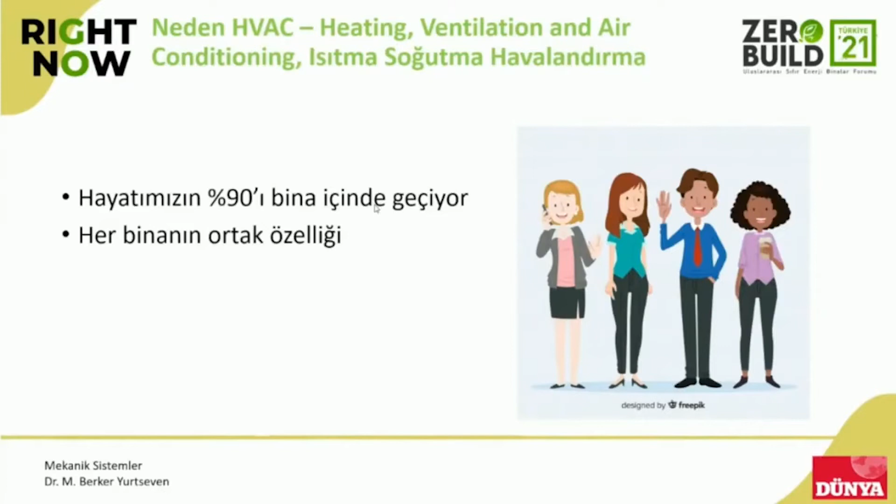Why is it important? Because these systems are important for our life, since it occupies 90% of our life - 90% of our life is within buildings. Of course, there are some exceptional cases for some segments of society, but that is the majority, and that represents the majority of the society. Of course, each building has a common need, that is cooling and heating purposes, and there might be different locations in a building that need to be cooled down or heated.

And as regards to cost, they cost a lot - 10 to 20% for houses, and for commercial buildings it is 20 to 50%. It depends on the purpose of the building, and also on the density of use, the level of use of these systems. Of course, if we use them in an intense way, then we consume a lot.

And it is also about our comfort - the comfortable life that we have depends on these systems, and we want to use them. When we look at the bigger picture, we see that the HVAC system produces quality air that we need, or that we wish, let me say.

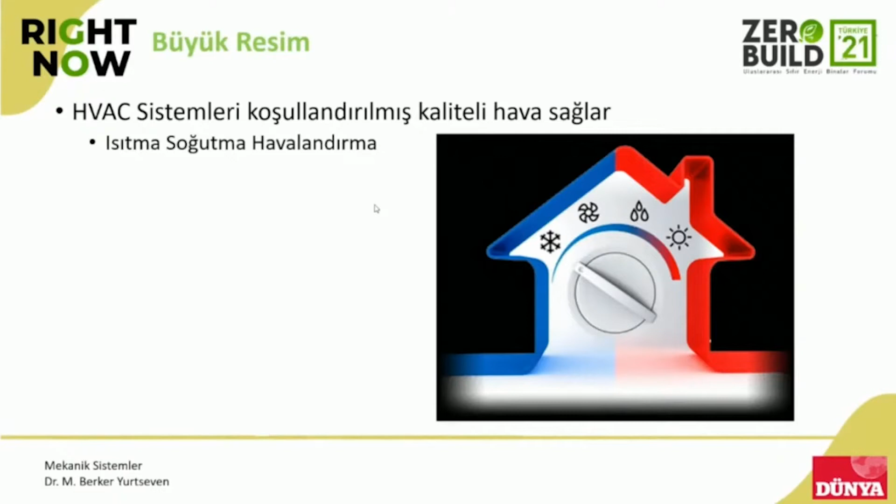We use the term conditioning very often because we arrange the temperature according to our need. And what do we need? We need to know thermodynamics. The professor made an extensive presentation in the morning, Professor Yunus Ali Cengel. We also need to know the dynamics of fluids. We have water and also heat, and we have thermal transfer, and we know transmission and conductivity.

Transmissibility is transferring heat from one location to another. It is important. The dynamic is important because the fluid moves in ducts or canals, and it is important for us.

We have these building energy systems, with different parts like HVAC, lighting, or other disciplines that can be used. We can also have transfer systems and these designs.

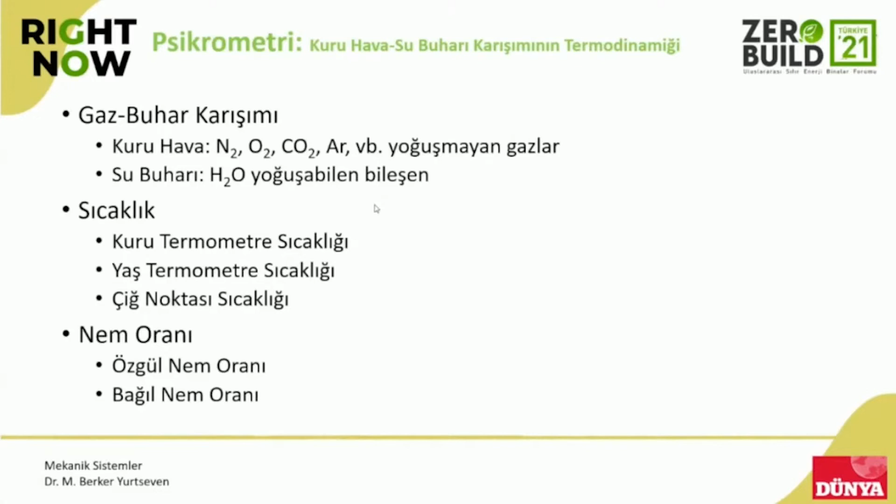Relative humidity rate is important, and also specific humidity rate is important as well for us.

When we look at heating systems, we all have a system except for the cities in the southern part. We need to generate heat. We have boilers, stoves, or we use the sun to get energy, or other parts. Then we distribute it to different buildings using ducts, canals, fans, or pumps to distribute the heat and energy to the buildings.

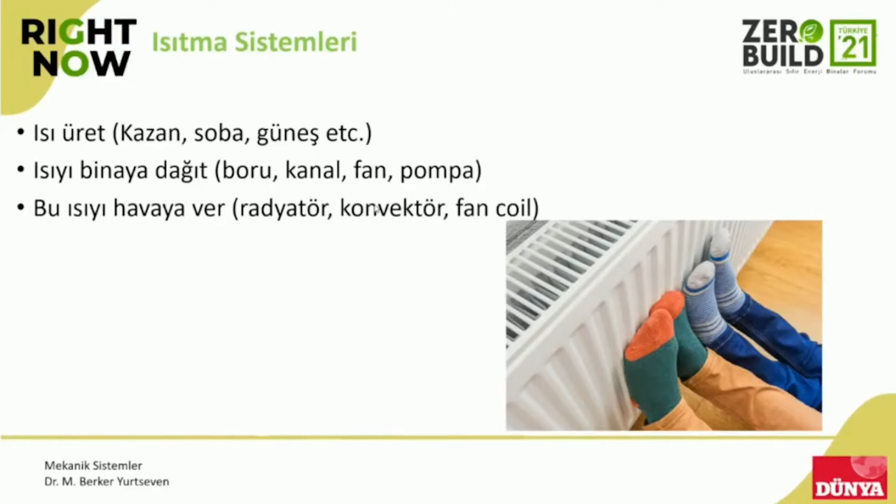Then we transfer it to the air. We have radiators, convectors, or fan coil units. We also have a system to control it, because when the temperature reaches the degree we wish, we need to stop and control it so as to prevent extra heat. We have valves and clamps, and we can arrange the speed rate of the water and control them.

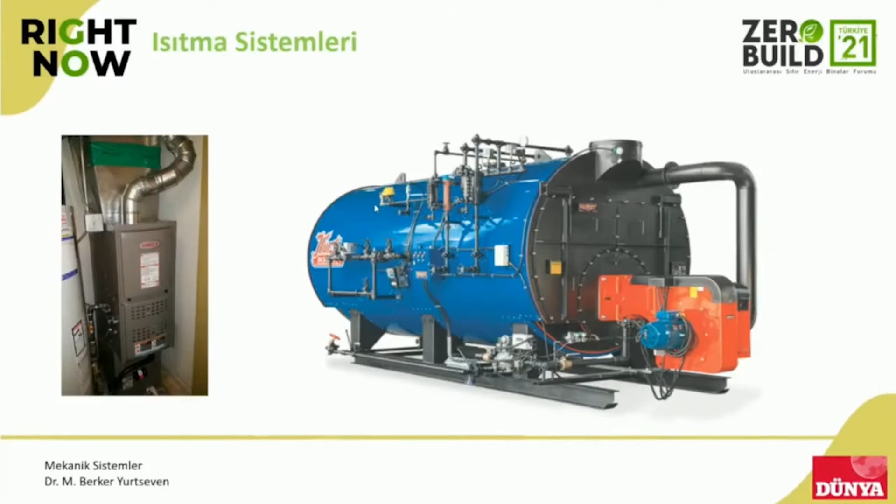We have boilers, which might be combi boilers or central heating boiler systems. You can see, especially in the Mediterranean region, solar energy and thermal solar systems. In the 70s, following the crisis, it became very popular.

We know these radiators; it is an old-fashioned system. In principle, hot water moves in it and it radiates, but it also heats the air so that it moves.

We have convectors, you see this one, with fan coil units in it. You can see the red points; these are usually copper pipes, and there are also aluminum wings, so that it transfers the heat.

In order to spread the system, we have mechanical systems with fans, and we achieve the heating purposes of the building. Then the water returns to the boiler, and the system begins again. So we get heat from the building for cooling systems as well.

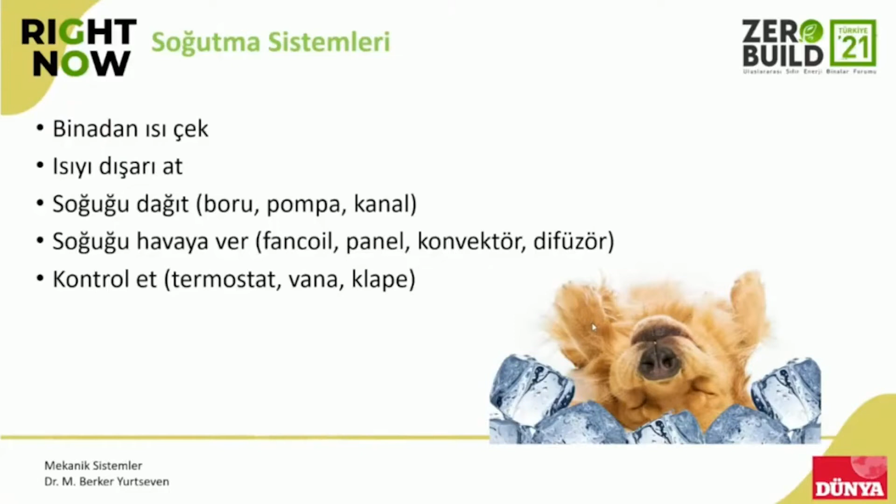We have some panels as well, and these are the key principles of cooling and heating systems. We still need a device to control it; it might be a thermostat, a valve, or clamps to adjust and fix the rate.

We also have ventilation systems. We need to get this system, and we will discuss all these issues in detail within the scope of the field.

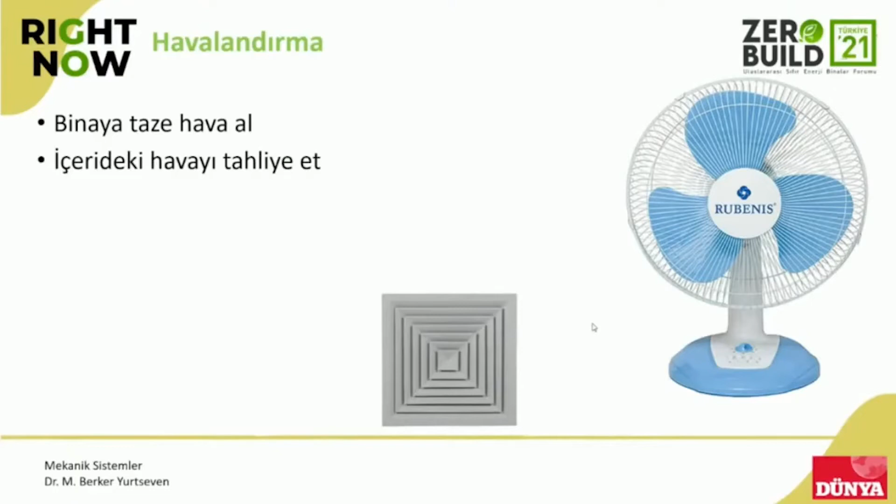We can use it in a detailed way, and we exhaust air in the system. Of course, this fresh air, we can use diffusers with this.

If we need filtration, we will use it, and we will have some controls here. When these tools should start or stop should be determined in all these systems. We also have auxiliary systems like the evacuation of gases, and systems for humidity and taking humidity. We should also have energy monitoring and management systems, in addition to the evacuation of condensing water, which are used in dashboards and other systems, allowing us to make adjustments. We'll be talking about it in later parts of the presentation.

So HVAC systems, cold and hot water installations, also natural gas systems, and also having fire equipment, security and parking lot systems, lighting, installation, electricity and communication equipment, as well as systems that provide reporting and illumination installations as explained by Professor Sermin, and Wi-Fi, Bluetooth or radio frequency using installations, and also lifts and escalators in huge buildings are part of the mechanical systems.

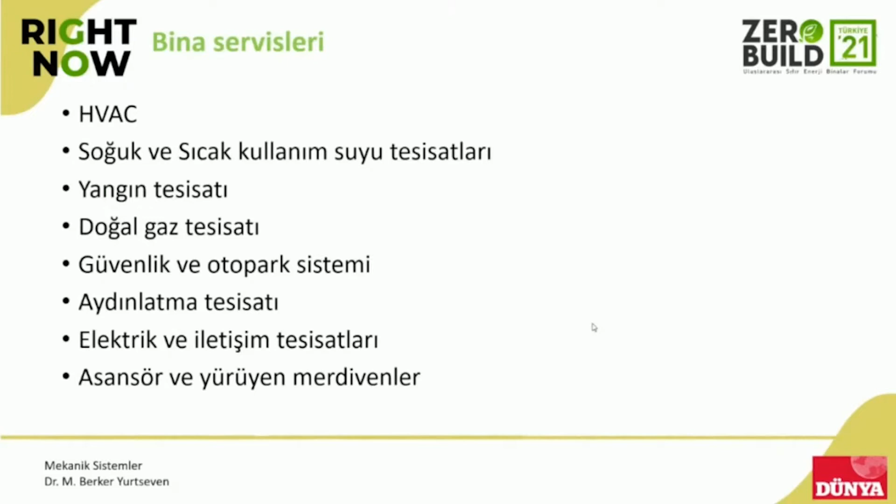They need to be operated in a smart way, and here you need to collect data, process them, evaluate them, and make the necessary adjustments.

When we talk about energy efficient building design, experience from the past matters, and we need a multidisciplinary approach with electrical engineers, mechanical engineers, architects, environmental engineers, and many other engineering branches should come together with architects, including the interior ones. And here we want to benefit from natural resources, the design according to the location of the building as well as its orientation.

We should choose efficient systems and devices to the extent allowed by the technology. This is not limited to their selection. They also need to be operated efficiently, maintained efficiently. If there are energy recovery possibilities, we should utilize them, as well as we should have training and awareness for users as part of this energy efficient building design.

And here, I would like to tell you a little about comfort. I know there's a session for that, but the science of ergonomy actually deals with the relationship between humans and environment in terms of efficiency, comfort, and health. At university, one of our professors asked what comfort is and made this nice definition. I think comfort, the professor said, is the lack of any problems between human beings and the environment.

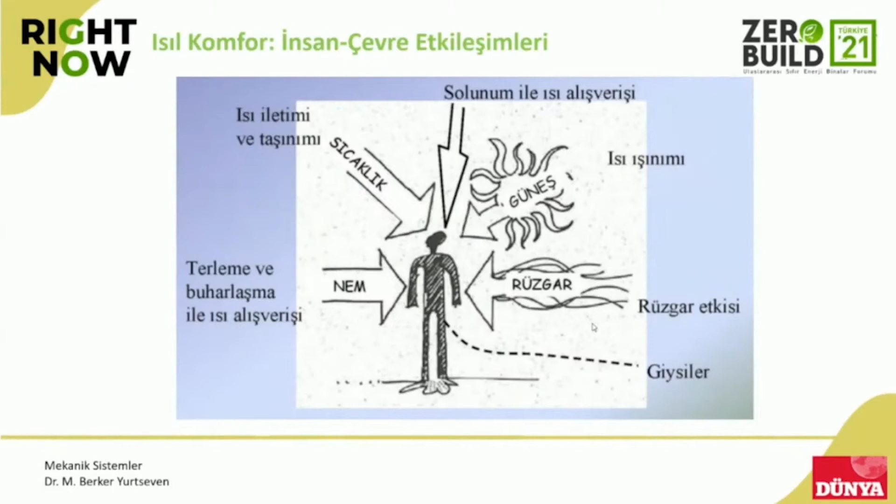So this is actually quite a complex system, and considering that everyone will have different comfort conditions, it's not easy to come up with a one size fits all solution.

Why did we refer to the necessity of internal air quality? Well, here you may have contaminants or sources thereof. We can talk about cooking products or chemicals like pastes, volatile chemicals like pastes and other flooring elements, paint.

Also, we can think about the respirable or breathable particles, including litter, external air, plants, cigarettes, production facilities, and we may have biological substances like the static water mass and other creatures, or radon and other radionuclides like soil, water, building materials, and also smells like volatile chemicals, and bad odors, including those resulting from cooking or cigarette.

In the literature, I encountered two concepts. The first one is sick building syndrome, and it is generally the sort of disorders that disappear after leaving the building, and mostly with undefined causes like irritation on the skin or other respiratory issues like headache, etc. The other concept is building related illnesses, BRI. Here, Pontiac fever, Legionnaire disease, hypersensitivity, and pneumonia, all impacting human health adversely.

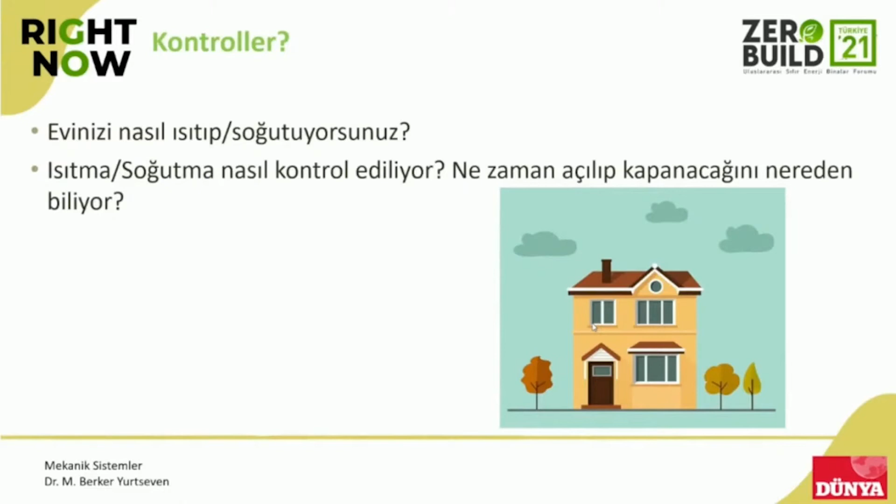And here we may have certain thermostat valves or other tools, and it is one of the least known control methods actually.

When we have a degree on an AC remote control, it might say 22, 23, 25, and I'm talking about static ACs here. Generally, they make it minimal, like 17, so that the AC can send out colder air and we can cool the inside of the room quickly. But the thermostat doesn't work that way. For example, in a split air conditioner, actually it is an indicator of the temperature.

Inside that room, if it is 17, then you should turn off. I want to keep it 20. I want to make it 17, AC continuous work until it's very cold, and then you turn off the AC.

Actually, the thermostat shows us the value we want to achieve. So if 24, 25 is the comfort condition for a person, then the AC should be regulated to 24, 25, so that it can help the device keep that temperature inside your room. Everyone has a different comfort zone, though some people might want 25 or 26, but generally it is between 21 to 23. That's how the thermostat works in all the systems.

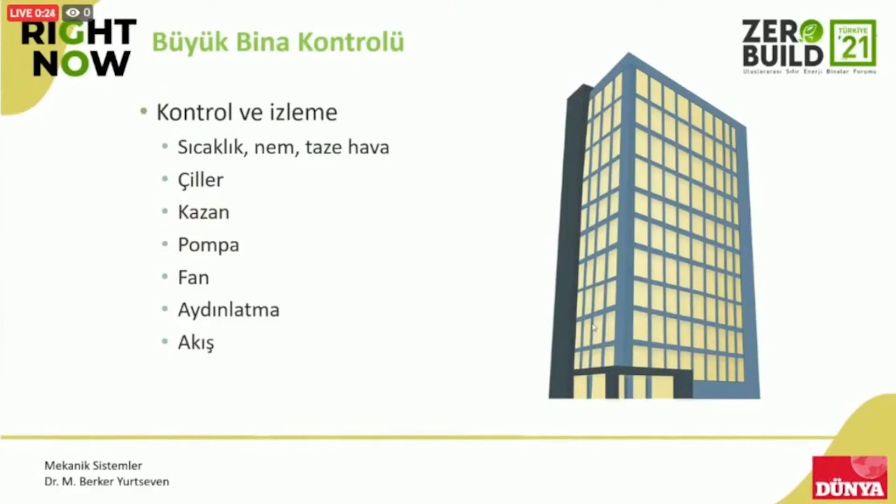Energy efficient use and effective use of energy, so that we can turn off the unnecessary running devices, identify any likely issues in devices by audits, and ensure that we maintain the building for all the individuals.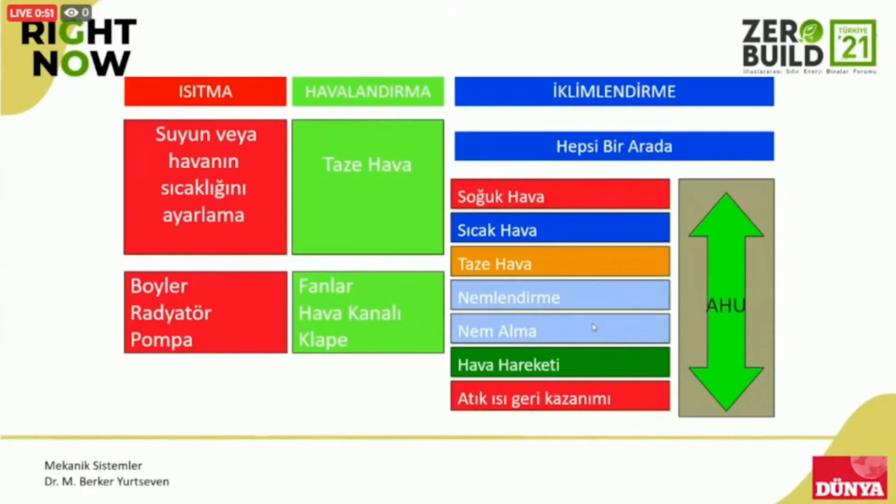We have heating, and here we have ventilation and conditioning. In heating, we have boilers, radiators, pumps. In ventilation, fans, also flaps or valves, and also the other elements, as you see on the third slide.

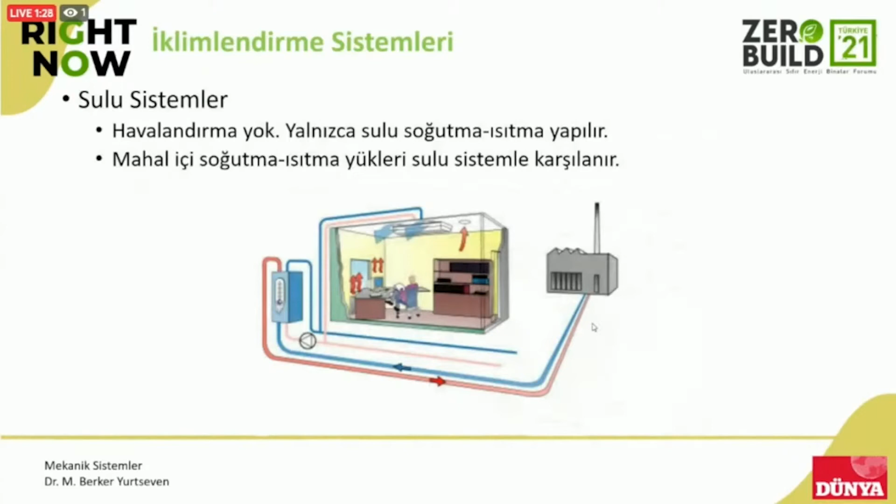We might have actually air-based systems. We can have a central climatic system, and here the circulation can be ensured after they are sent. Also, we might have air and water-based systems, or we can just have systems running on water, which depends on your technology and design. Central air conditioning systems, how do they work?

As for the air handling unit, AHU, in Turkish Klima İklimlendirme Santrali, these are systems carrying out multiple tasks at the same time.

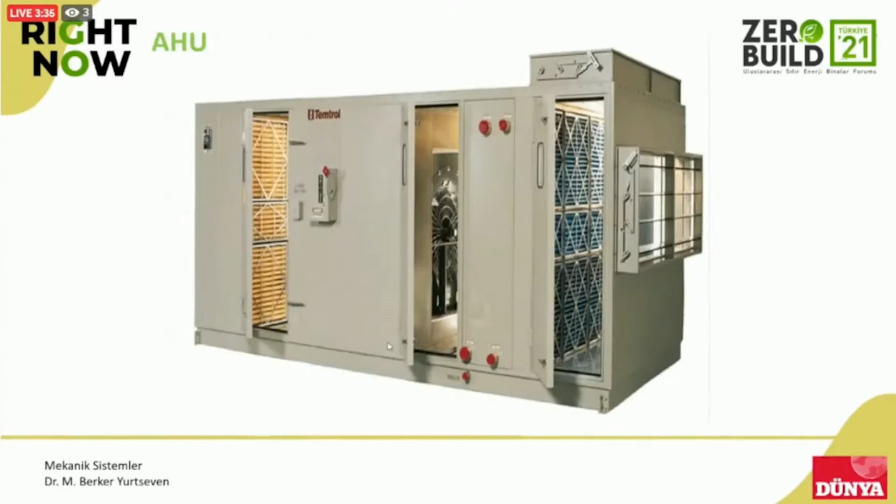It's an AHU. There's a fan inside the device to activate the air, and there are filters. There are, again, valves or flaps to make adjustments, and there are cooling and heating units. This is, again, another wet plant which I photographed in the past.

All the pipes are insulated. It's a good practice example, because when we spend energy, we should prevent the system from losing or giving these values. As Professor Yunus Çengel stated, if the heating value increases, the heat transfer increases with convection and radiation. So when we look at the functions of these units, air conditioning, air heating, and air cooling are the purposes.

That's the main purpose. A typical HVAC system is like this. I inserted the English phrases as well. If you are curious about them, I will tell in Turkish.

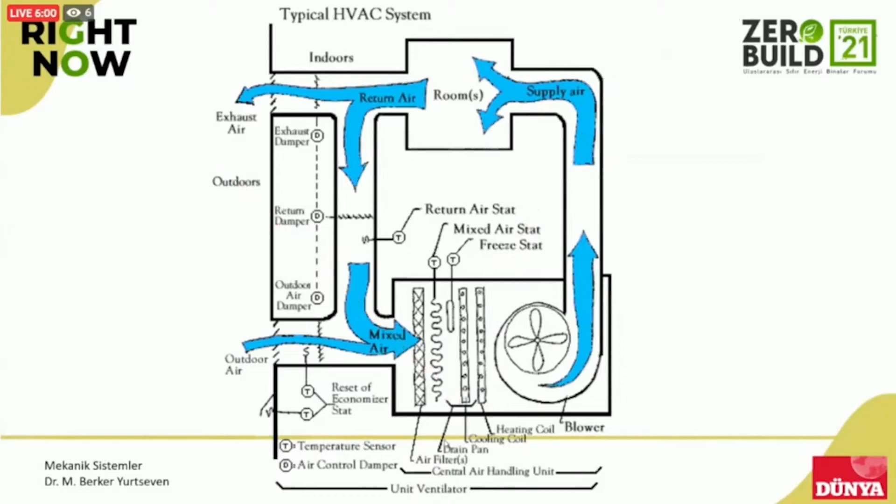Here you have this outdoor air sent to the interior. Let's say it's a cooling example, with a cooling element with copper pipes, as stated earlier, used to ensure heat transfer is heightened. Hot or cold water goes through and it gets heated or cooled, especially in the cooling moment. The vapor transfer capacity decreases with lower temperature, and we evacuate this water through these holes.

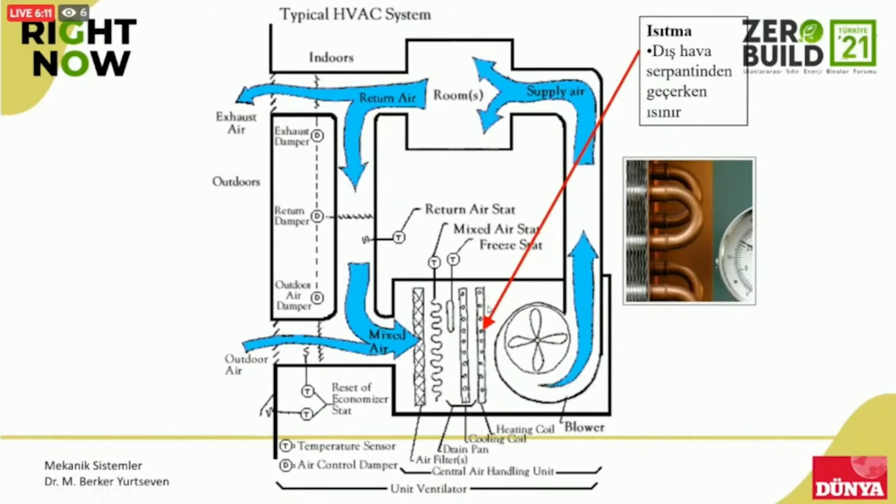In heating, there's this heating serpentine like the other one, and here you have hot water circulating, and the air is heated and sent to the interior.

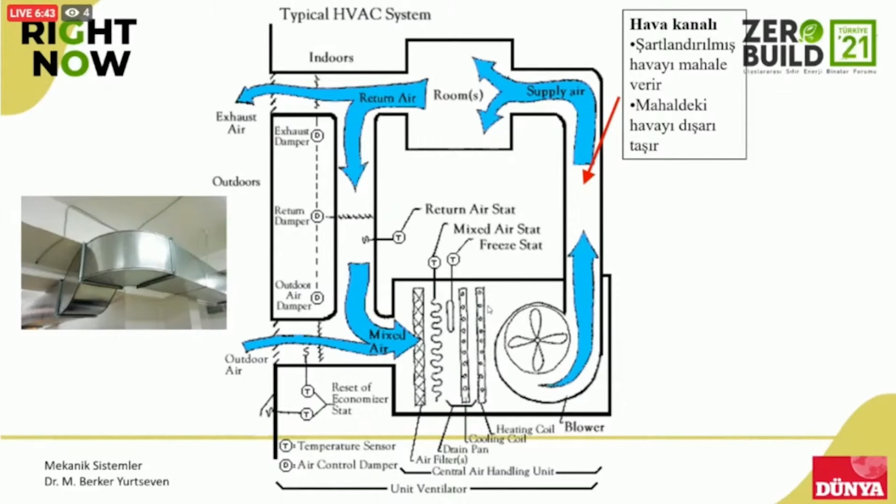We have such fans to create pressure while circulating the air and apply pressure. There are such pipes, and their design matters in terms of amount and noise aspects. So you need to run good calculations.

As for air ducts, they send the conditioned air to the interior or used to send air to the outside. Here it emits noise, and it can actually impact human comfort as an external factor.

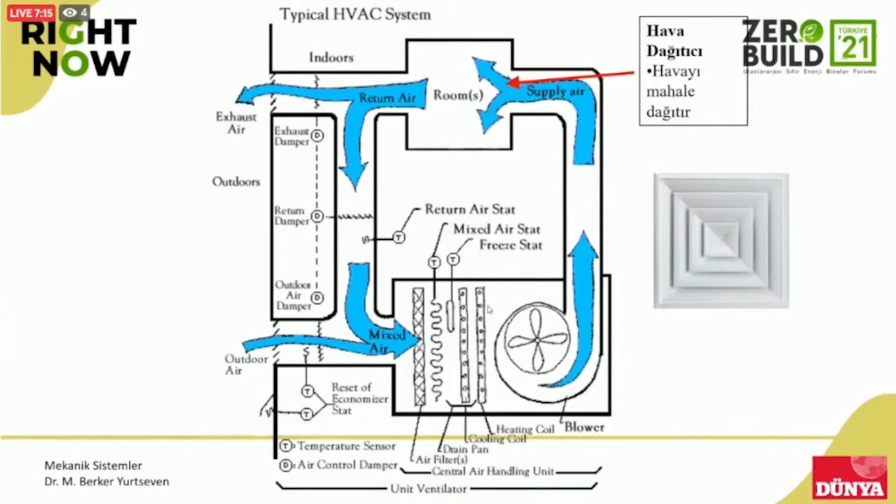There are diffusers with different types and structures, as you see in this picture, and they are placed before the air duct and distributed to the interior of the structure.

We have flaps or dampers as called here. They can be manually or automatically controlled, opening and closing, or opening to a particular percentage, and the air flow amount can be determined by them. There are those running on an engine or running manually.

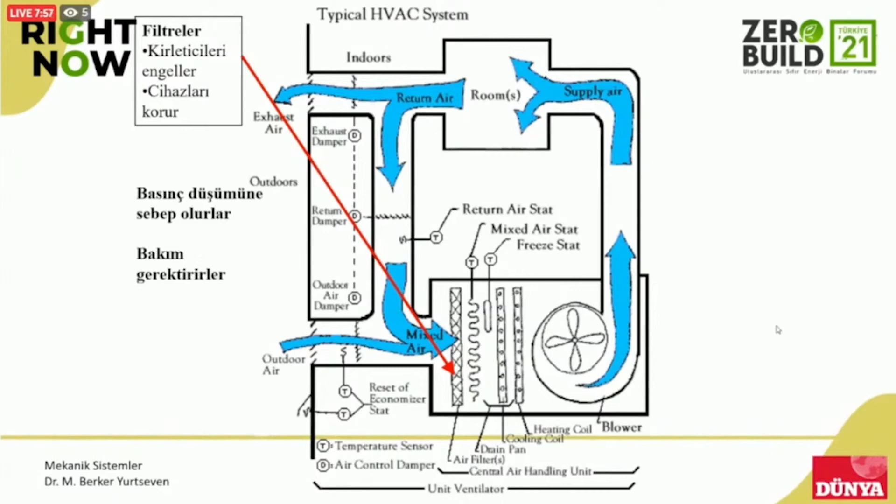Filters also matter as they prevent contaminants coming from the outside air, and they protect our machines. If they interact with the devices, they may cause certain clogs and cause the pressure to decline.

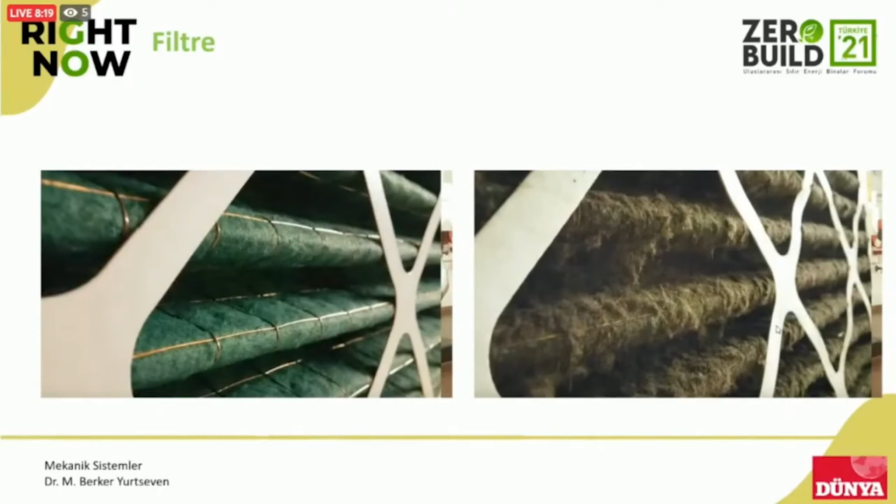There is this example I wanted to insert. This is a newly installed filter, and this is what we encounter after a while. We need to ensure maintenance and keep them clean, because I think no one would like to intake the air going through the filter on the right.

We should also check the air conditioners inside our homes. Maybe some of you opened the device to encounter this picture, especially in workplaces. I ensure cleaning for these devices.

I can easily open the lid of the internal units. If you wash them with soap and water, you can easily carry out the maintenance. Otherwise, it can appear like the photo on the right-hand side, and this may impact the performance of your air conditioning device as well as your power plant. So you need to pay attention to filters for that reason.

And there are thermostats, there are pressure measuring units. For example, this return damper, which we call klape in Turkish, is controlled.

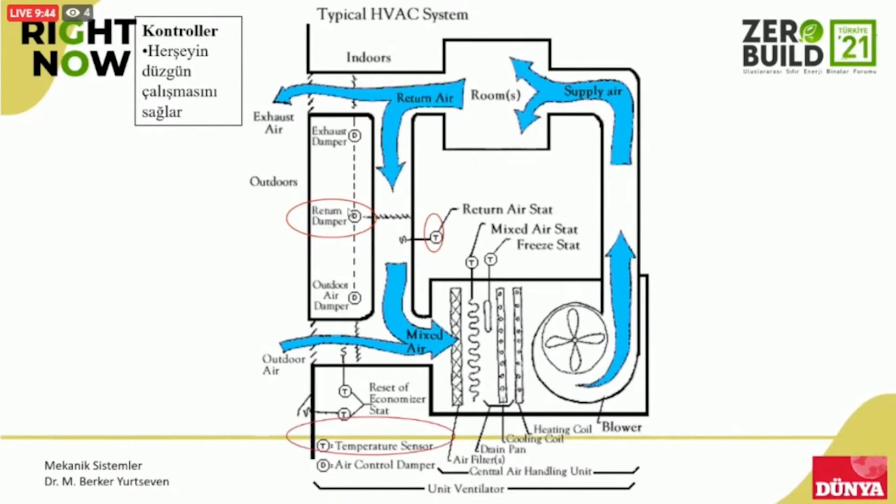And here there's this heating return air stat control or humidity control units. So the working of the devices and the controls inside the structure need to be well maintained, well cared for, so that we can identify issues beforehand.

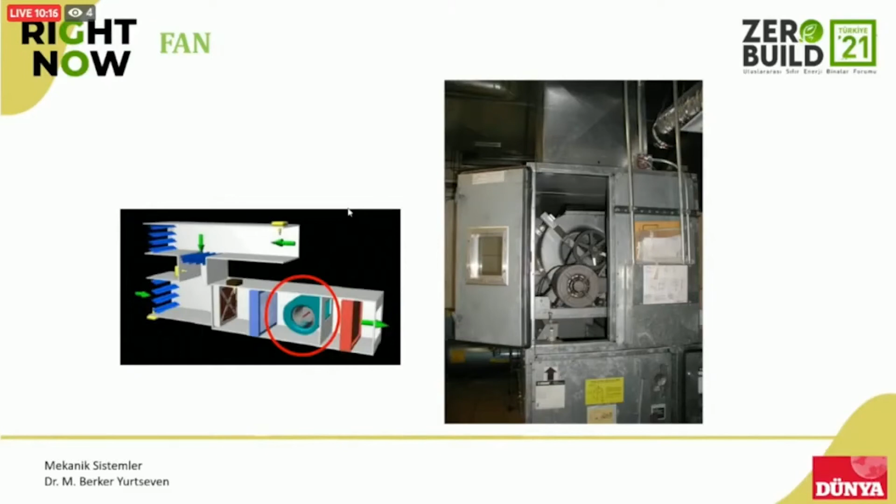I wanted to insert these images. Here you see the fans creating pressure for the air to circulate inside, and they're embedded, and filters may be installed with cascades or in a flat structure. Different filters can be used.

HEPA filters, bag filters can be used. Of course, as you thicken the filter device, you may need stronger fans because they create resistance towards the flow, especially when they get contaminated. So we need to pay attention to all these as we design them.

And we have heating and cooling serpentines in these units. I think that would be my last slide.

In addition to what Professor Sermin stated, I'd like to make the following remarks. All the building systems, all our lives are surrounded by sensors. In the past 15 years, we were talking about new technology or efficiency, but now actually we talk about how

to process the data, how to handle decision-making mechanisms, how to carry out optimizations. In the past, we were learning about statistics, but now we're talking about data engineering or data analytics, data analysis. Of course, these are overseen by people from computer backgrounds and people with statistics backgrounds.

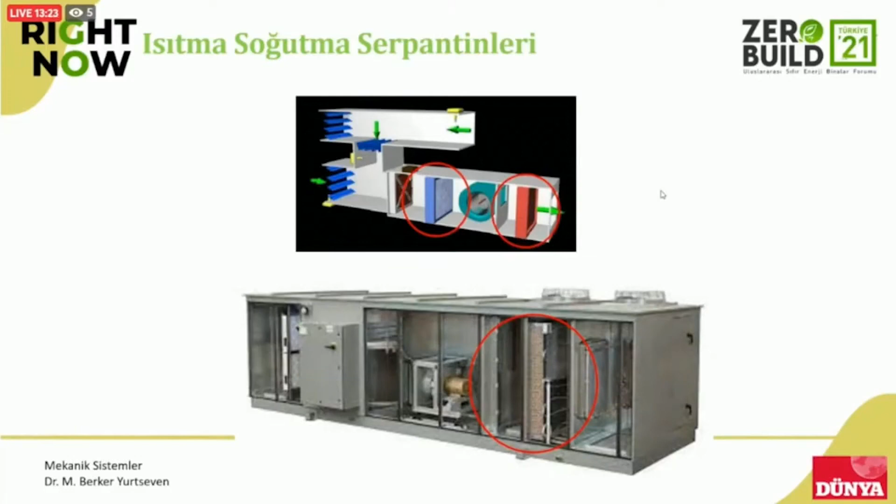I explained all of these in a quick fashion because our professor said I'm stealing some of your time. That would be all from myself. I'd like to make this announcement.